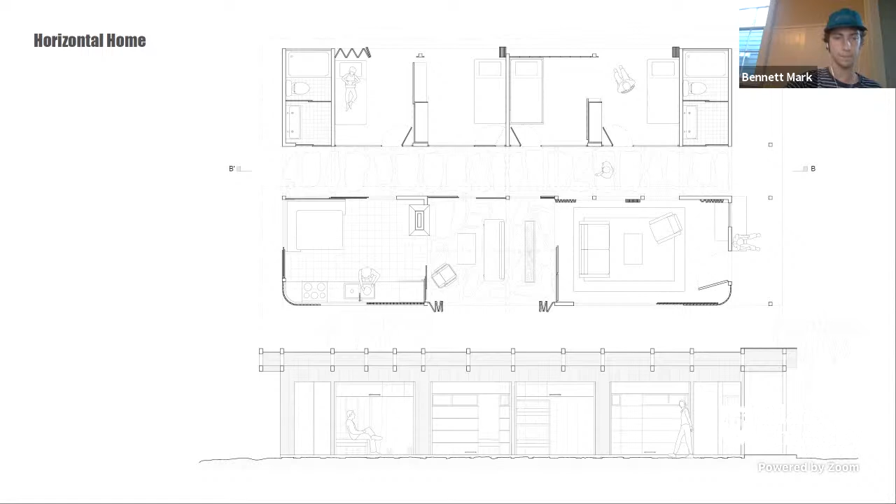In my other projects, I continued to use structure as a driving point for my designs. After defining the feeling that I wanted to achieve in each project, I thought about how the building's structural connections and materiality can help create that feeling.

When drawing porches for the porch exercise, I came to realize how vital porches are to a New Orleans block. Porches in New Orleans are a great example of the community feeling that exists here, and I believe that they're an essential piece of the New Orleans home.

The site is a typical New Orleans block covered with an eclectic combination of different homes. There are many idiosyncrasies between each home, creating a lovely and authentic atmosphere. It is important to maintain this level of authenticity and uniqueness on the site. There's a struggle between collective housing and the sense of individuality that a home provides.

To balance these two ideas, this project employs the concept of incremental housing. This is the process by which homeowners themselves become involved in the construction of their homes.

There are essentially two different types of units, but the units on the ground floor are slightly different because they have double height spaces with lofts that serve as bedrooms. The unit on this page starts off as a small sized home, but then can be expanded by the owner via light wood frame construction to become a medium-sized home.

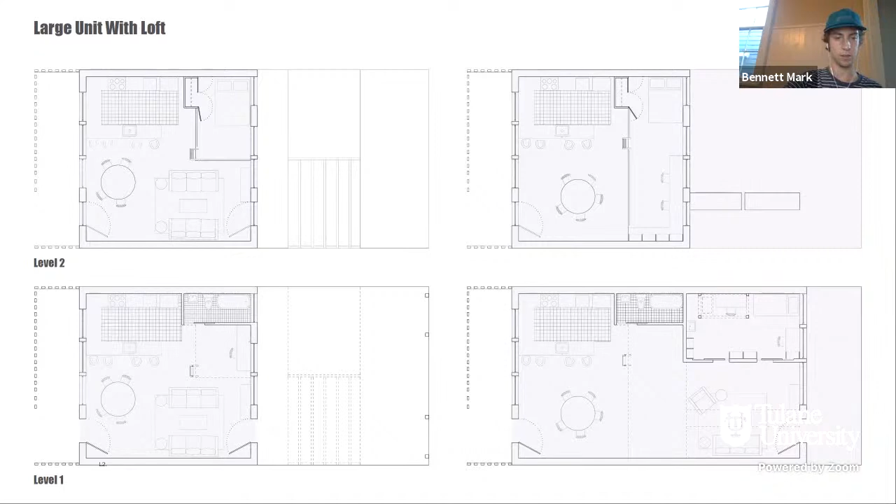Here we have the small unit plans for a typical floor, and here we have the large unit plans for a typical floor.

The project has a central space running across its west-east axis. This creates a path that is open to the public. This space would serve as a park or plaza within the co-housing structure.

On the ground floor, there is a stage for small performances, a large workshop for working on personal projects or for constructing pieces for expanding one's home, and a community house that has large tables, a kitchen, and a lounging area for hosting events. The houses on the second level are connected by large decks that act as both circulation and communal space.

In the center, the deck becomes even larger to accommodate outdoor cooking and dining space. And on the roof of the workshop, there's a garden where community members can grow their own produce.

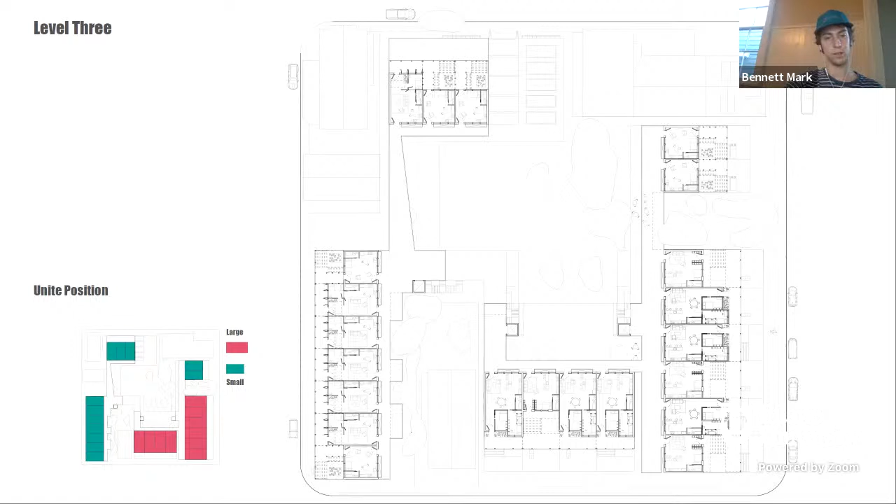On the third level, the decks are minimal to allow natural light to enter the lower spaces. In section, the building creates relationships between the different levels of decking and the central plaza. This allows people on different levels to see what's going on through the entire building, which encourages social interaction between the building's inhabitants.

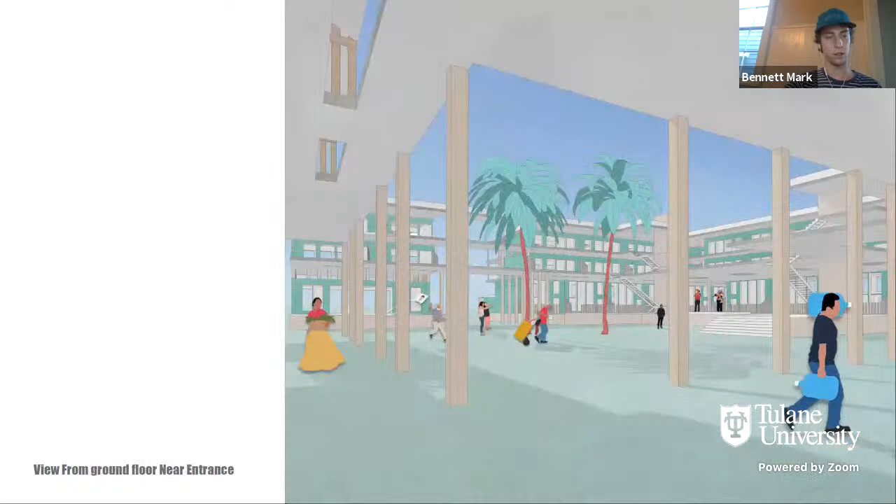The project is primarily constructed out of wood, as it lends itself well to creating intricate and rhythmic structures. Working in perspective, the project tries to achieve a relaxing and free-flowing feeling. Its goal is to be a space where someone can feel comfortable and at home. Thank you, that's everything.

Thank you very much, Bennett. So now we have the feedback from the reviewers. Let us know if you want to, Bennett, show any specific drawing, or if you want him to go back at any point.

I'm trying to get the concept board up on my iPad. I'm getting there so that I can look at all the drawings together. Perfect, thank you, Wendy. I guess now I need to navigate to you here.

I'll start in a somewhat banal but important way, which is that, Bennett, I think your graphics are really strong. I don't know if that will be the case across the board, but I think not only are they really clear, they're also compelling. They're clear both in terms of the intricacy of the plans, including the furniture and entourage, but also in terms of your intent and the diagrammatic pieces.

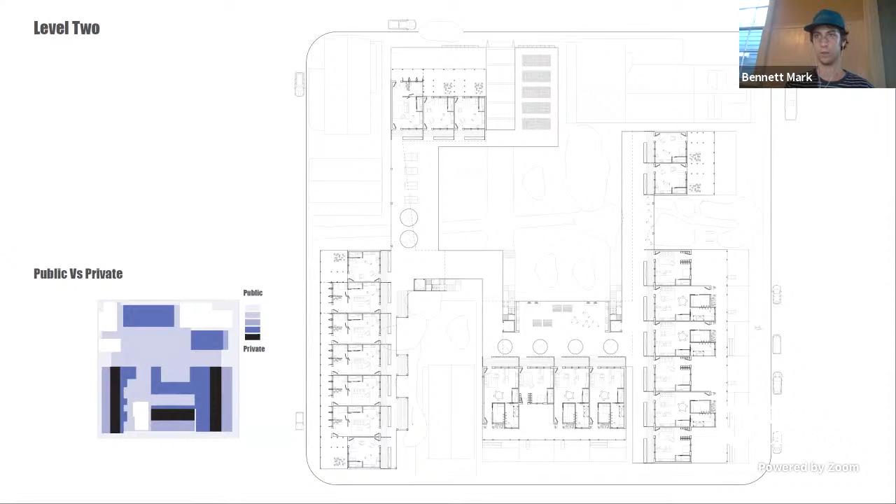Mostly when it came to the organization of where the units were on the site, I was mostly trying to keep each porch having access to the street, and also trying to create that central axis through the center to create a kind of an open public space. So that was kind of the driving factor, the two driving factors in organizing it.

It's a difficult problem, because on one hand, in the surrounding blocks, in your normative residential block in New Orleans, there is a very clear, almost linear progression from most public to increasingly private. The interior of the block is typically just splintered up between lot lines from one house to the next. So there is no shared public or semi-public space typically in the interior of the block. But in your case, there is. So figuring out how to manage those two mirrored images of gradation from public to private is an interesting concept.

What do you have facing that collective space? I see, are those kind of backyards, terraces, or secondary porches? How do you move from the houses into that shared space? They're kind of like small back porches.

I think it shows well in the perspectives. See, you can see it down here and here. It's like a slightly more private space when you're leaving your house. Maybe you could put a bench there, or keep your bike there, or some plants. So it's supposed to be like a small transition.

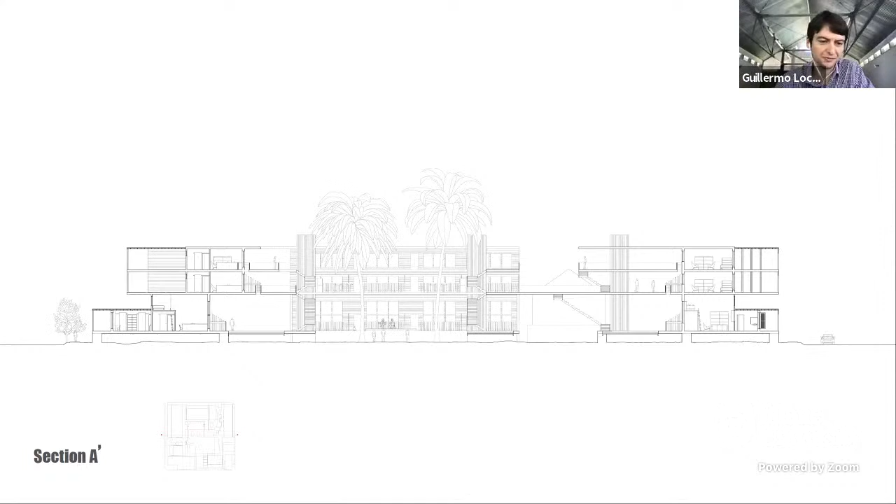We have time, so it's okay. All right, I guess I'd start with a question, but there's an implicit comment too, which is that one thing that really strikes me about New Orleans residential neighborhoods in particular is that there's such a disciplined and rigorous measure of unit, and a kind of application of that unit, whether it's a single house or a double house.

I have several pictures I've taken that I love, that I've put on Instagram, of looking down a series of porches that are meticulously aligned down an entire block and even into the next block, where it's really almost like a shared room, a little bit like what you created in the interior, where you have a long shared access corridor, but with subtle demarcations of: yes it's shared, but this is my house's contribution to that shared corridor. I think that really exists in many New Orleans neighborhoods where the houses are very meticulous.

Of course that's created, I'm sure to some extent, by mandate, by setback codes that were consistent for all the houses. But there's such a consistency and deliberate alignment of those spaces. So I guess I wish, a little bit, you've created an amazingly rich series of spaces, both public and private, outdoor and indoor, but I wish there was just one thing. Especially since you emphasized it, and I totally agree with you, I wish that porch element was something that, whether the porches are deeper or narrower, they all align and kind of overlap at some point to create this peripheral zone.

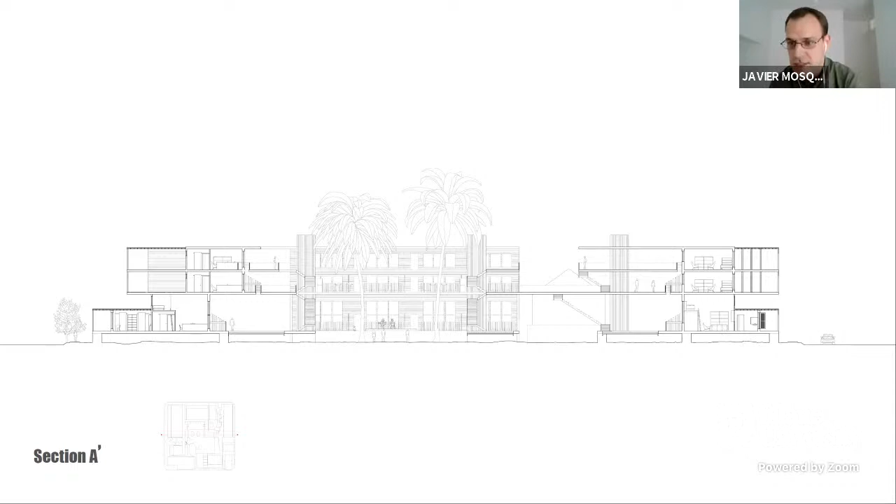I'm saying this just as further steps for your project. Right now it's really, really well done. I would also say I appreciate all the effort you put into drawing the house, the home unit. I think it's a really well drawn and thought-out unit with all the measures, and it's great work. So congrats, Bennett, congrats, there you go.

I will jump in, following on Wendy's and Javier's comments. I'd like to start by congratulating you, Bennett. I really like the way you've approached the idea of context in New Orleans for your project. And if you can go back to the axo.

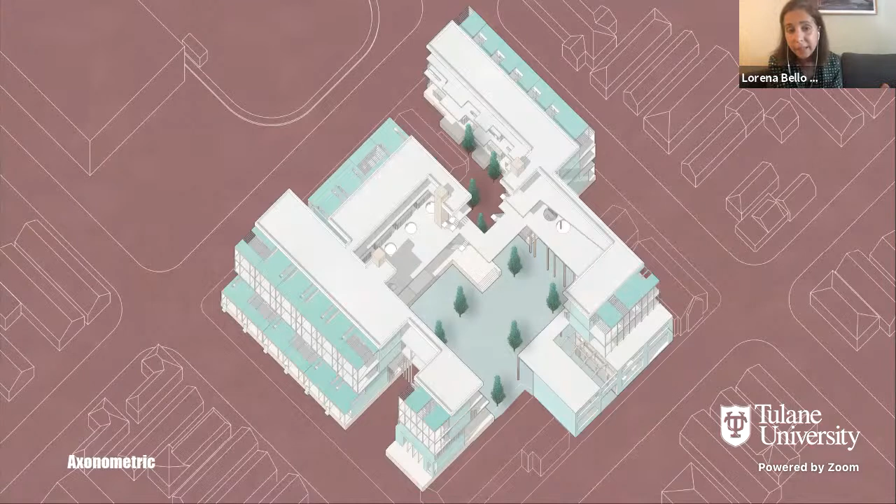Here there is something very interesting about the idea of densifying a block in New Orleans—a very interesting block that is all kind of square, made of very long units, as we see in the blocks to your north, south, east, and west. I don't know what's happening to the west or where north is here, but in every direction there's this particular block and very long houses that work well with the climate of New Orleans, which is extremely humid and wet, so architecture is normally very thin.

As you don't want a lot of moisture, everything you want is ventilation. I understand there's a diagonal in this massing effort to somehow open winds into that block. I'd like you to explain more about how you've thought about winds and drying out moisture, because in the section you are above ground, really responding to this idea of detachment from the soil that is wet.

I also see a lot of permeability that talks about that. But please tell us a little more how you have confronted the idea of thermal climatic response to housing in the city of New Orleans. That is one question. The other, responding to Wendy's and Javier's point on the idea of pores, I see a difference between your approach in this axonometric - the southwest is totally different from the southeast, and it seems different from the northeast as well. I'd like you to talk about your decisions on how to confront the street, and why in the northeast you keep your facade at the same datum, whereas in the other two you create a recess in the second floor with respect to the street.

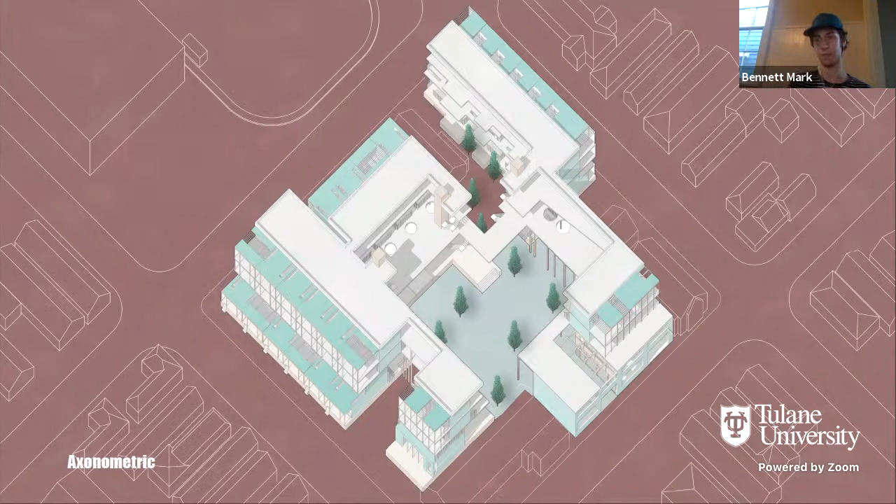Did you take the wind into consideration when thinking about the massing of your project? What is the major wind direction in New Orleans? I'm not actually sure what the prevailing winds are here, but I was mostly trying to keep everything as open as possible on all sides. That's just how I like to design my buildings - imagining lots of breezes and a very open, free-flowing environment.

It would be nice if you could clarify - what is north in this axonometric? The north would be running... it's actually this way, this street. Yeah, I think this is Dryades Street, and it's running towards that street. So let me annotate.

So let's see, would you say north is like this? No, I think it's 90 degrees to that. I should double check it though, to be honest. Yeah, it's here. This would be north, and to the south would be the Mississippi River, because every block confronts the street. If we see the north, where is it, let's see, so north south, then it will be here.

It seems that, and Wendy can talk more to that because she has studied this, I haven't, but somehow there are these long blocks that are always confronting this street.

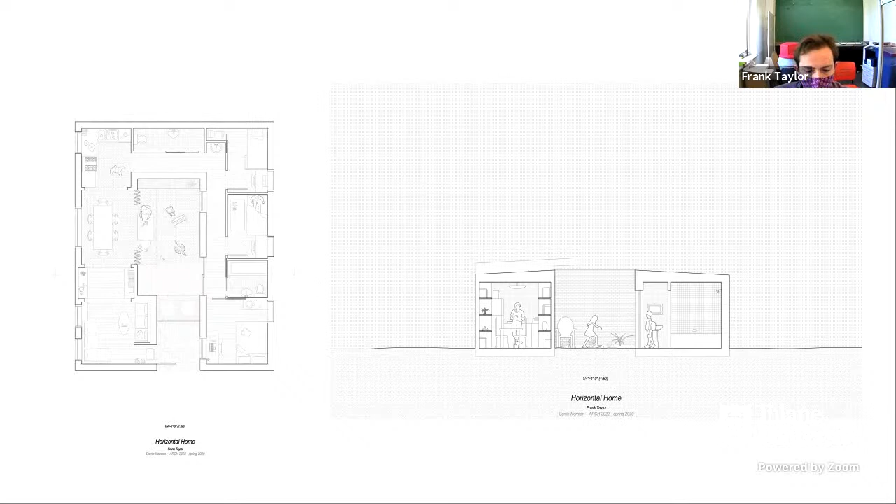In the vertical home, I explored how the public and private could be separated vertically and arranged spaces so that the higher you get off the ground, the more unfrequented spaces become and the more undisturbed you become. The sectional home gave me a chance to explore both verticality and the frontage of open space, with multiple floors featuring courtyards.

Moving from single home projects to a project involving 60 homes, the early idea for this aggregation scheme was to organize it around a series of courtyards and have its walkways in the built environment set up a grid and separate outdoor public programming.

Furthermore, it brings 2 great civic institutions into the urban block: the park and the library. The things you might find in a public park weave into the grid system on the ground level, and as you travel up to the second level into more private residential space, small libraries are woven in. The ground level focuses on exercise and physical wellness, while the second level offers a quiet repose from the action and more stimulates the mind.

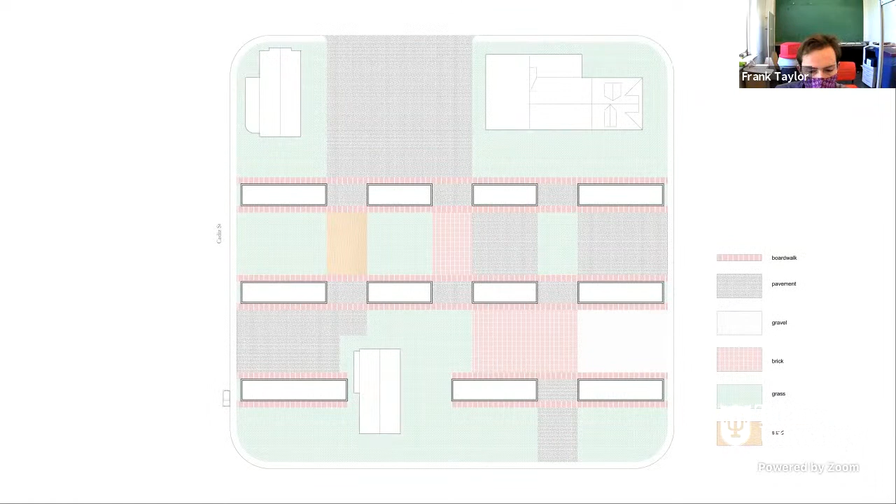This diagram displays the organization of ground textures and materials, which consists of a boardwalk, pavement, gravel, brick, grass, and sand, and a more developed version shows how the park is broken up and assorted around the block.

The outdoor program, consisting of basketball courts, a mini soccer field, volleyball, a skate park, mini golf, an amphitheater, food trucks, and others, is split up around 11 interior spaces that contain stair and elevator cores, lobby and mail space, laundry, ping pong, and pool tables. There is a separation of private and public access as well.

Residents of the block can access it from the east and west side using boardwalks that lead to building entrances. The public can access the block on the north end, which also allows space for food trucks, and the south end.

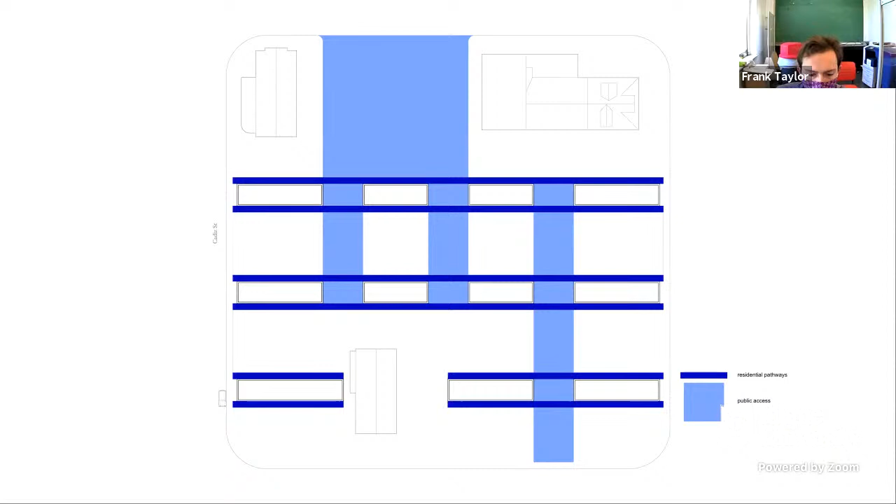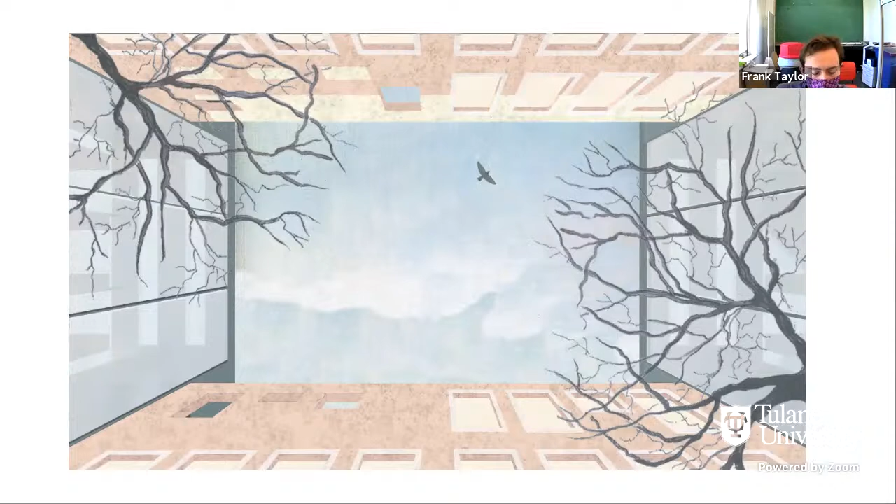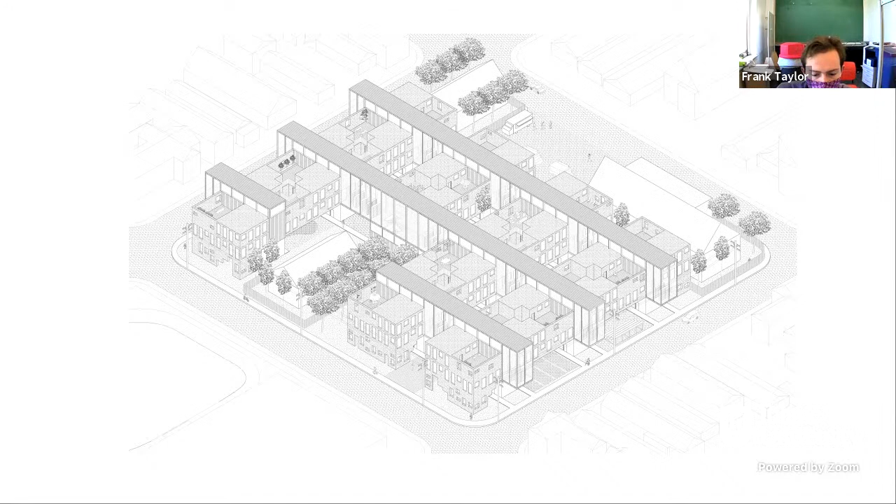The grid formed by the intersections of the heavy apartments and the thin floating hallways and the intertwined park and library ultimately creates a community that is tight-knit, where people cross paths often, where you can dwell in intimacy but are never too far from the excitement, where a bounty of physical and mental needs are just a few feet from home.

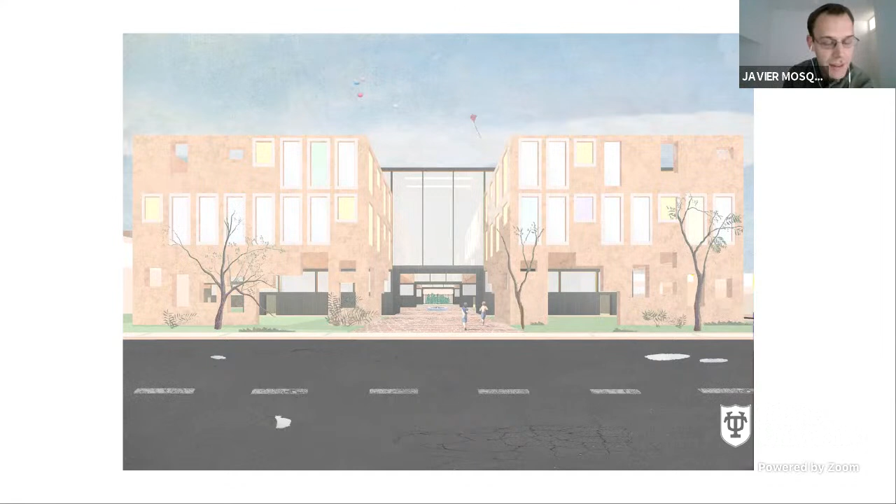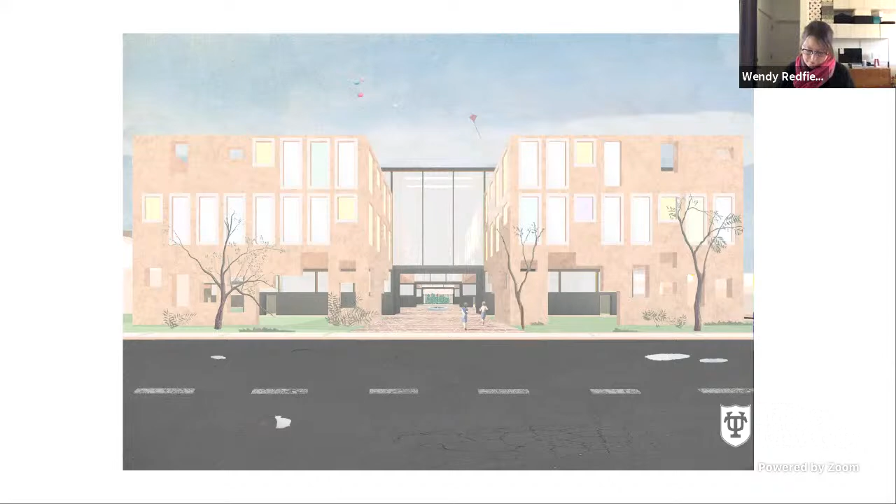Frank, congrats for your project. I do like, the strongest idea you have for me is the stripes. So I would like just to say one thing, why didn't you keep following that stripe idea inside your homes? Could you go to any home unit? Yes.

I just, as the stripes, do you mean the stripes on the glazed, the library spaces, or what exactly do you mean by the stripes? Yeah, you have those stripes, right? Which are the library, and those stripes, which are the homes. And then you split this stripe into two parts, because you have one and one, this side, this side. So once you move inside one of those, for instance this one, you have this stripe, but for me, once you move into this interior, it's a little bit more confused. Why don't you keep following this kind of stripe idea?

I don't know how. Yeah. Maybe just understanding that this is clearly shown. I don't know how, but yeah, trying to. I think he means just at a smaller scale, as an organizational device, right? Yeah, and that's a great comment. Yeah. Keep following your idea, maybe.

I think I definitely put more thought and time into the organization of it on the larger scale, and I could have incorporated more of that for sure into the units. But it's just like, if you were able to have one more week to develop this project, I will jump inside your home units and try to explore what does it mean building a home with the stripes.

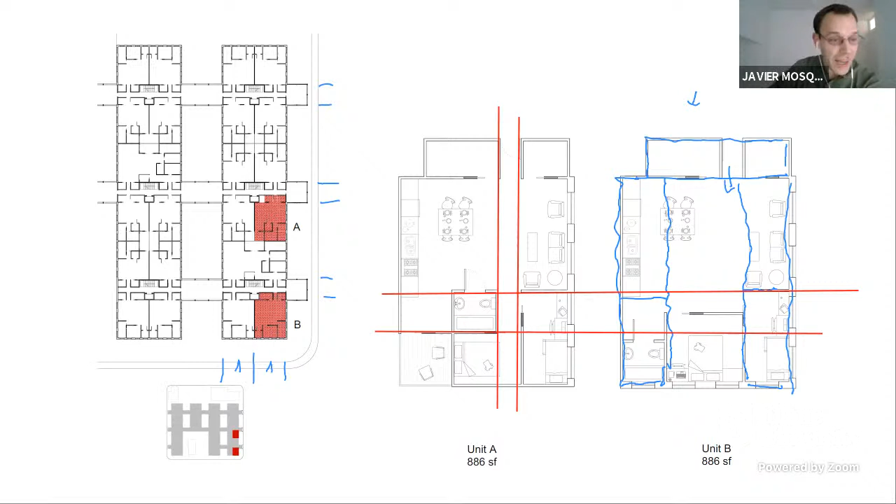And I'm sure you did research on what it means to put different materials into the ground floor. But it's just like, what does it mean building, how do I live inside a stripe? A private stripe, a day stripe, a night stripe, a cooking stripe. I don't know, just have that in mind in order to keep growing with that. But congrats, Frank. Congrats. Thank you so much.

Frank, I join Wendy and Javier in saying that it is a really fantastic and really thorough project. And I totally agree with this idea of really meticulously working with the right scale in context, because somehow it just feels right. Like the height feels right, the composition of the block feels really right.

The relationships with the remaining buildings are really well worked around. And I have to agree with Wendy that somehow when you go into the axos, it just feels like, yes, continuing with the idea that in the axo, things are very fragmented while being connected through a mat building. So it's all a mat that can be connected in both directions, and then has different levels of individuality and collectivity, which is really well done.

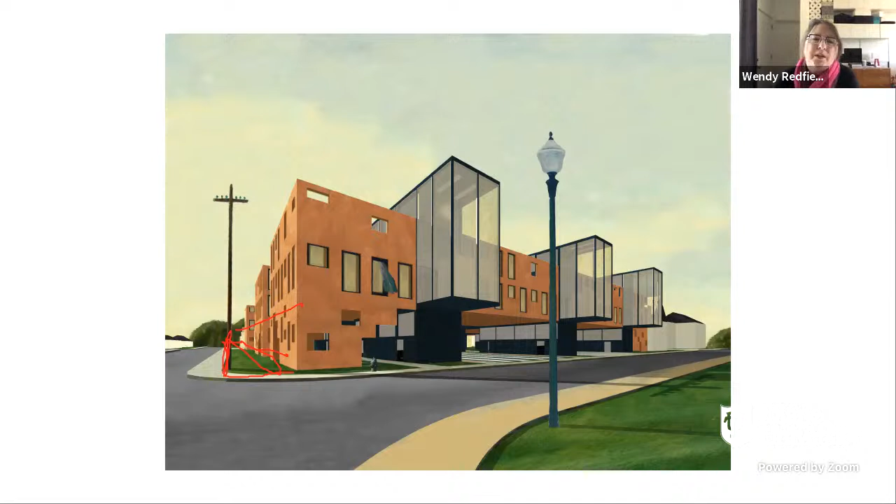I think in part that's what Lorena is talking about, but you need a loggia. It doesn't even need to be a loggia. A loggia to me is almost a European or urban porch, an indoor-outdoor space that's really part of the building facade. If some of these, because I don't think you have any units on the ground floor, right? You don't have any interior there, right? So really, you could take a good bit of that whole lower level and make beautiful, sort of perforated veils of brick that could make it feel less institutional, more inviting, more porous. It would be literally more porous, but also, from the standpoint of imagery, more inviting and more porous.

I think this project is so poised to be taken to that next level of development. Everything just requires more time. I'm not at all surprised that with all the work you did in plan, particularly at the urban scale, you did it so well that you didn't necessarily have time to develop those ideas on the vertical surface. But I think that would be the next step, because you've done a much better, more lively project than these couple of renderings are giving you credit for right now.

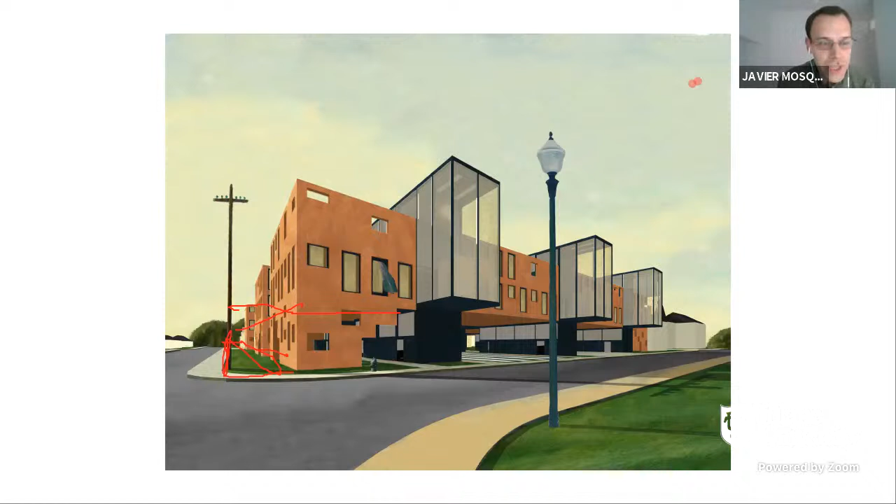So talking about this one more week, what to do in this one more week? Maybe different solutions for the same perspective could be a nice way to explain your project, because it's a modular system, and we change the glass and add whatever. With that in your portfolio, you explain that you're not just working in New Orleans, that you're working on a system. That's the strongest point of your project. Thank you.

Frank, thank you so much. I am so pleased with the feedback you've received on this project. It confirms what I've suspected all along. This is such a thoughtful concept, and it's really difficult to move a good concept into a good project. I commend your commitment and dedication to following through. I love this image. I congratulate you on the body of work, the drawings, the development. I look forward to seeing what you come up with next, Frank.

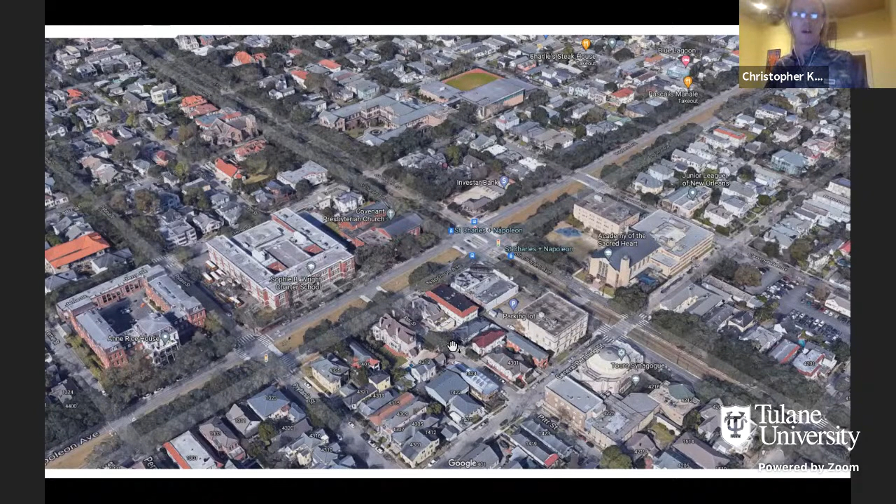I was looking at Audubon Park here on the left, just the way this transitions from the water to the stone and up. There's also the Plaza del Desierto, which was really the inspiration for the pixelation of the interior courtyard, where you could have a deck, a stone paver, concrete, water, marsh, whatever it would be. And then there's some gardening plots, any of which could be used for a garden.

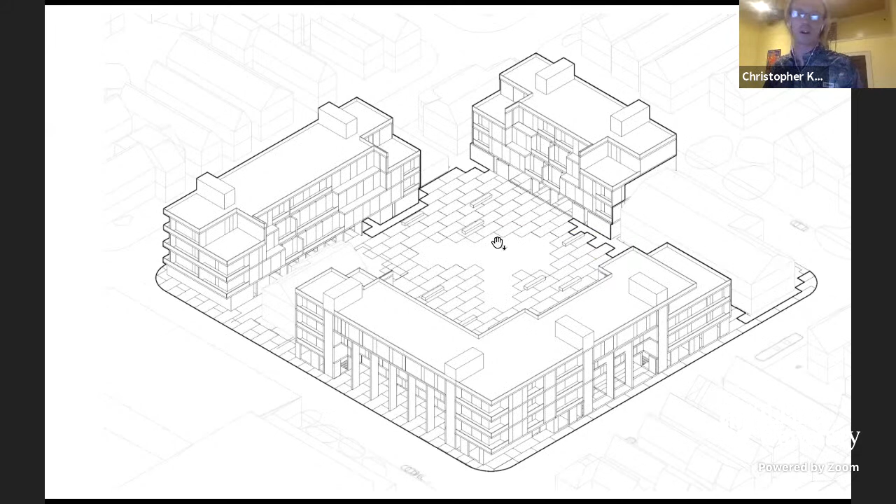Again, the main ISO, so you have to imagine, for lack of it being drawn, some of that's concrete, some of that's marsh. Ground floor plan, we can get into it—the interior rectangles I was imagining as just long concrete benches. You'll see once again in this perspective, I'll try to hustle through.

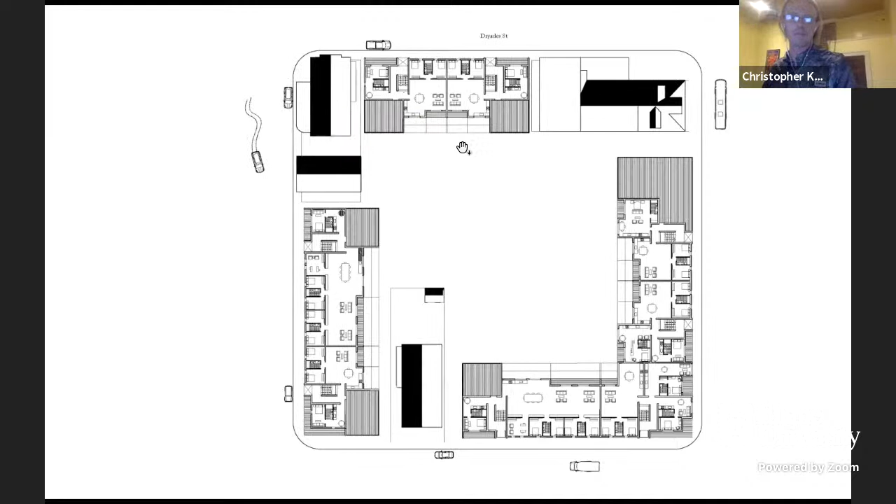Typical floor plan—you can see this is the vertical core accessing an extra small studio, a small 1-bedroom, and then a 2-bedroom.

Just to compare the same logic on the top floor, where you chop away that one unit. Another logic where you essentially take that same unit and double it in size, but there's nothing that really changes about the plan.

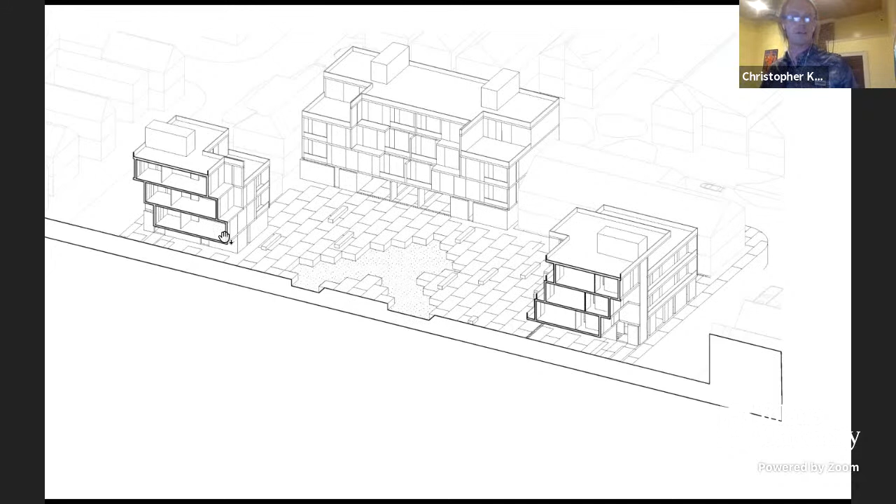In the perspective, you can again see that the unit is divided in two, front to back.

Again, 60 units right on the nose—look for the size. This is an axon that demonstrates just how dense that really is.

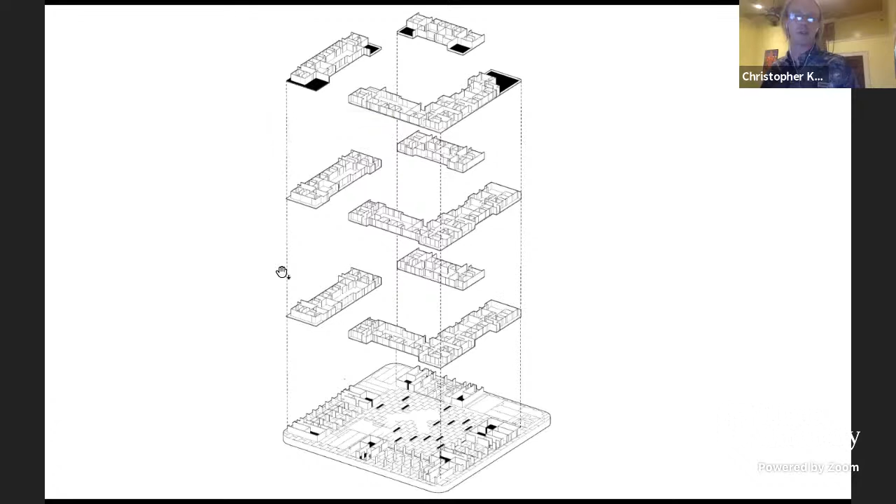A couple quick diagrams showing these collective balconies on top, where you could access all the way from the core and arrive at the top and still have your own little balcony, just distinguishing between the public and private zones.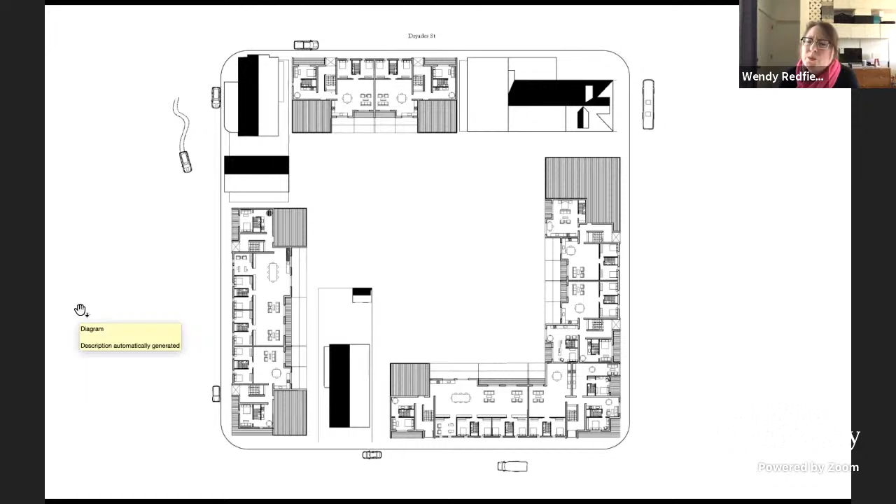I'm not sure, in this area, if it's really noisy at night, maybe you don't want to put the bedrooms on the outside. I really don't know. If you want people to be able to see second line parades going by, maybe public space should hug the street, I'm not sure. I'm sure you could make a good argument either way. But I just wonder, if you thought that through, what the logic was as to how you zoned the units, from public to private.

Yeah, that was, I think, the initial logic behind cascading those central units - that you could have a front and a back porch either way. And then when it came to trying to densify, that kind of went away on the edges for the sake of just adding two units where it used to be one.

So the cross ventilation went away, and along with that issue you're bringing up, the whole logic of how does it relate to the public space. Where the other issue especially is, when you arrive out of the core right here, you have this zone that's just essentially nothingness to get you only to your unit.

So there was, could be more of an effort to expand that area on every level, so you could kind of have a porch that was a collective porch but not a private one on each of those cores.

But yeah, in the end, just iterating down to get the number of units, when it came time to choose which unit do I chop off, the outer or the inside, I chose to chop off the inside so that you could look this way. But I do see the argument for the other one.

And there's really no consideration for any sort of solar exposure, which would really define that answer. I think these are essentially just the same units translated around. There's a little bit of an effort on this corner to create more porch, but...

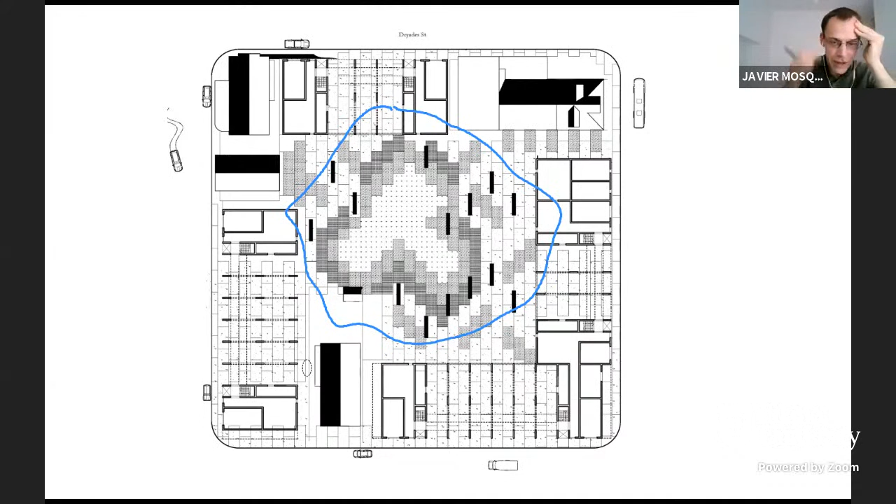I go with Wendy's idea, right? So could you imagine that, let me draw again. Could you imagine that this is your block, this one, and could you imagine that this house is here, this one is here, this one is there, that one maybe is, I don't know, here.

Could you see all your project not in a vertical perfect cut in all the facades? It's here, man, yeah, it's here. What? And then let me. No, it's not so easy.

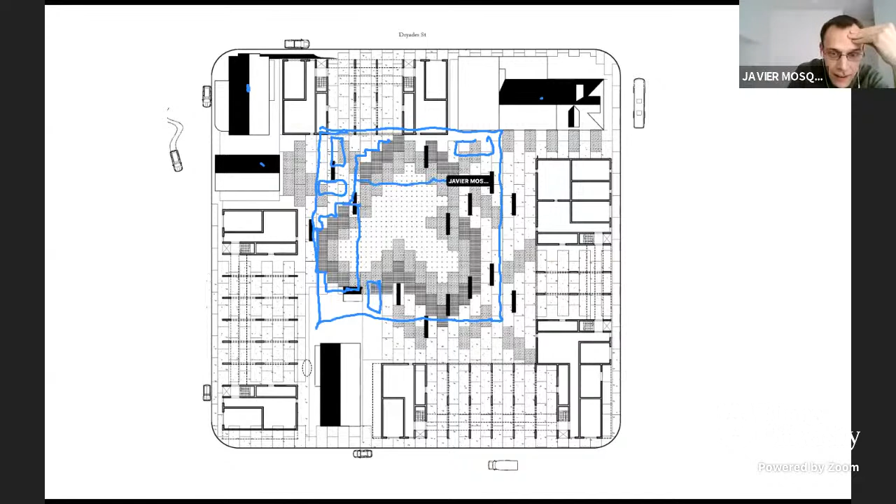It seems to be easy, but it's not, it's not easy, but it would not be amazing so easy. It's not so easy because here, yeah, then you could do something different in here, and then find out what's going on in here.

What I'm trying to say is that all the movement that you create in this pixelation idea, for me the key word in your project is the pixelation, that you use it just for the urban problems, but then when you go and jump into the home, and solve your horizontal home, and applied it into your project. There's one more week to work, and that one more week could be just one unit.

And try to find out what does it mean to pull and push this facade, and where do you pull and push that facade? Because when we saw other projects, this street, that street, that street, and that street are not the same. There is one that is a big empty space in here.

So maybe in that one, you don't need to do any pull and push thing. But on the other one, you could do something that could be helpful to recover that idea of New Orleans porches, loggias, or whatever is the name.

And then going back to this thing, to this gift you gave us, so nothing. Interesting. Yeah, that's really hitting some light bulbs. It's like you take all this time to come up with this idea and then go back to the beginning with that idea and incorporate the rest of the context.

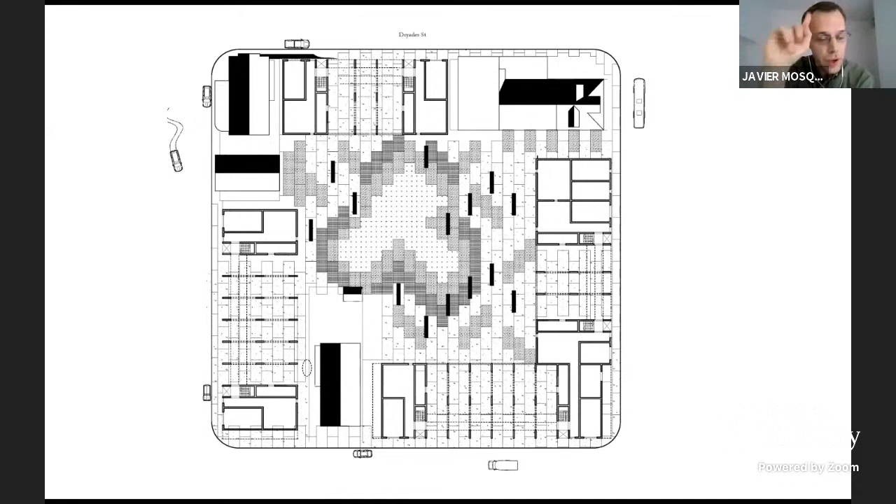I see. But having said so, I have to say that all the answers you gave to your units are a pretty serious game. You play with the rules and you find how do they work. But now it's time to keep moving on and discover how far could we get.

And just one more thing that I don't see really clear in your project is what is your intentional community? Where is it? Yeah, I think I'm skirting around it. The intention is to simply bring nature into the urban grid. And we had talked about garden plots and all this, but that's, I don't know, it's just a placeholder.

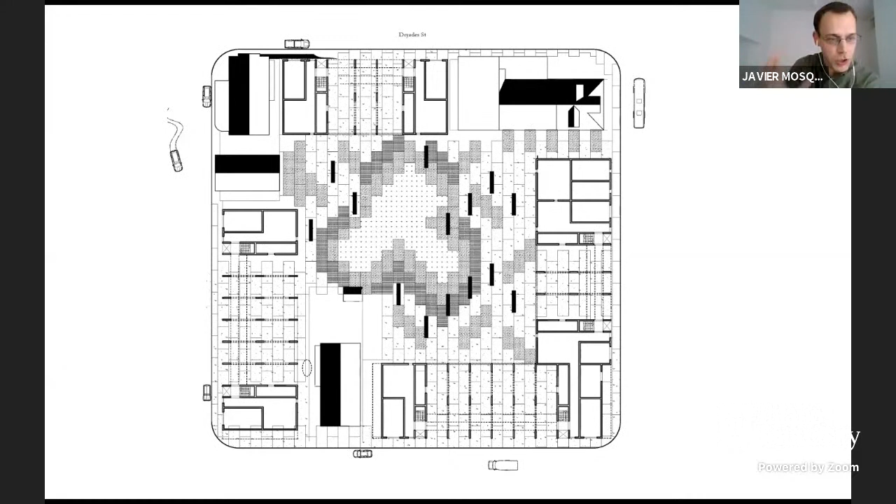Well, but when I ask this, it's because it could be an opportunity to keep developing your homes. All that upper level, all those terraces, okay, this is empty, so common space. It's not like that. So it's what does it mean to put an empty space into a building which is called community? Nothing else.

Well, it will be difficult to follow Javier's enthusiasm. Hey, that's fine, that's fine.

Christopher, congratulations on the project. I was just going to add some observations that I think are really helpful in the way you're working with the urban block. Somehow the buildings that remain in the block, and I agree, to me the most beautiful drawing in your presentation is the ground floor, because it is allowing us to read a lot of effort in addressing what is there, and responding to conditions that you are trying to tame by that interiority of the block, which I think is fantastic.

I have a question regarding the difference between, because the name is Plaza del Desierto, but in reality I think it's in Baracaldo, in the north of Spain. So it's a very rainy place, and the idea is to somehow probably work with the water and the pluviosity of that site.

I am really intrigued by not seeing a lot of trees in New Orleans, when I would say, you know, when you go to, I've been to Savannah, never to New Orleans. I am assuming New Orleans is even more humid. And Savannah is this amazing explosion of trees with all these branches hanging into your body, like an embodiment of humidity. And I wonder how do you mesh that idea of that beautiful ground working with the water, with vegetation that maybe is not that low. I don't know if that will be a possibility in your project, because the tree is a pump in itself, and it seems there is a lot of humidity to pump in New Orleans, and I really see this as a system that starts to understand that the interior of the block can be extremely performative towards that climate and towards that humidity.

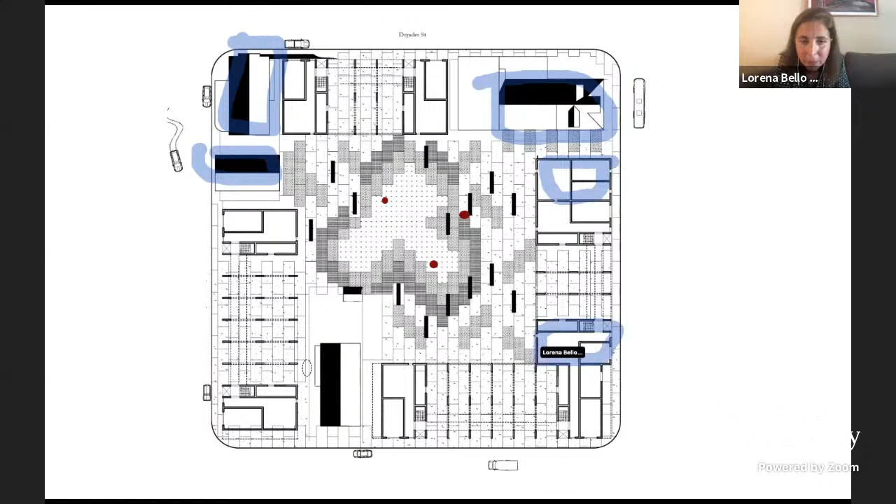My question is, I really like that you have these buildings that look like anchors into that block. Because on each side, very intelligently, the brief leaves these remainings, and somehow I read that if this is an anchor, and this is the other anchor, and this is the other anchor, these parts of your project are also anchors to your buildings themselves, right? Like somehow they are anchoring into the ground and allowing this porosity to enter, but also the water. So the idea is that if you are filtering through the block, then you need to think how this water enters when there is a catastrophic event or a lot of rain, then you need to design for that entrance. So that could be designed in section, and that would be super interesting.

I also understand you are thinking about this as an open plaza. And I don't know how the inhabitants, the community of this block, will feel about that during the night. But I see some dashed lines, so maybe you are thinking that at night you can close this and open it. Can you explain that, Christopher?

It would be less night to day and more - it's mostly closed off, say with some sort of vegetation facade or something that is visually porous, but you can't physically come across there. Perhaps right at that line, each of these pixels would be a little body of water or something that is just another deterrent to go through. But then if you, let's say on a weekend or farmer's market or something where there was an event, you could remove some of those facades or slide them and they could come through. But the idea is that most of the time the public could only come up to that threshold and be able to look through. So to actually access, you'd have to come through these openings - this opening here, through the building itself, through the anchors. Yes, you can think about that a little bit further and how you can make this maybe more available in hours during the day. That will be very helpful.

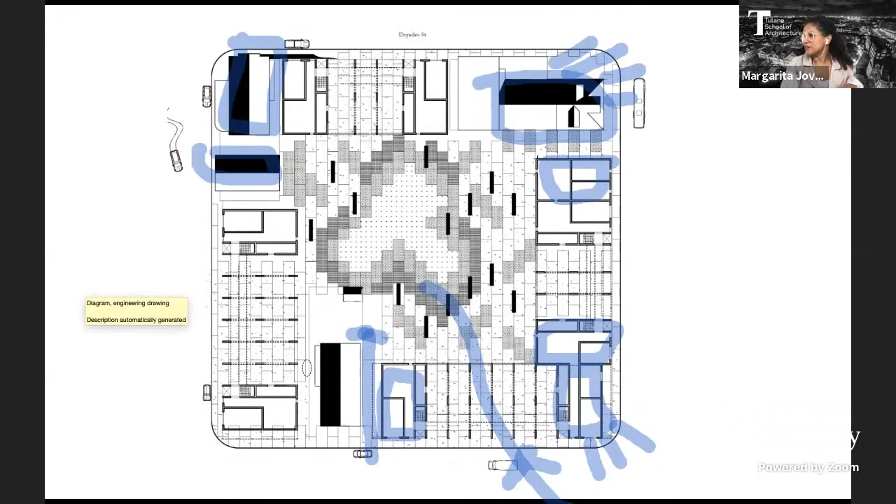I'm leaving to the other one. Thank you so much. Thank you.

I can kind of see what you guys are trying to say. There's back and forth between coming up with your idea and then just stopping and totally rethinking it. I was concrete and glass all the way, but now hearing you guys say that - come up with an idea and then make it cheaper, or make it simpler, or integrate it better into the context. Maybe you could say a word to the nature of this whole game where you're constantly reiterating things. When do you ever land and stop?

But do you say cheaper because concrete is more expensive? Yes, that was my thinking. But it's energetically also far more expensive for the earth. Somehow all the movement is trying to move farther away from processes that take a lot of energy. I don't know how concrete works in Massachusetts because it's very cold, but probably, I don't know how it works in New Orleans. Maybe it also gets moldy. I don't know what the performance of concrete is in this climate.

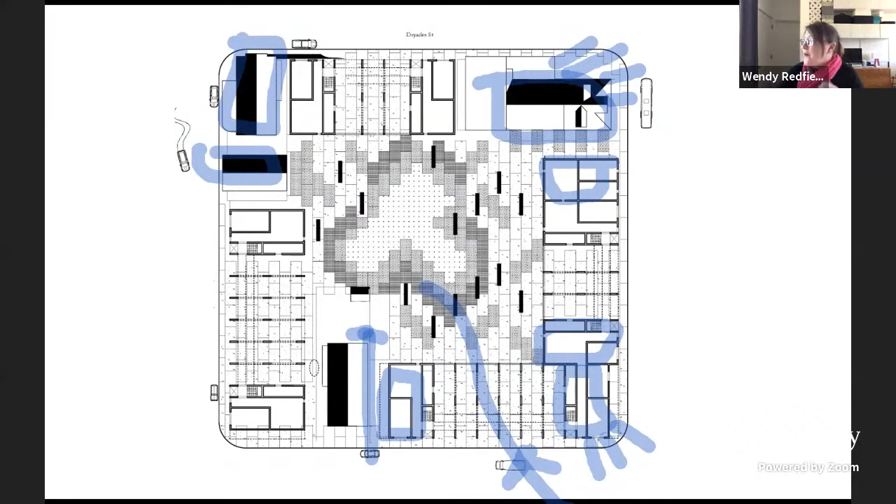I don't have a problem with that per se. The thing I definitely agree with Lorena on is the use of vegetation, particularly trees. One live oak tree in the middle of your beautiful floodable plaza would be big enough to handle a lot of rainfall and soak it up, but also provide shade, reduce the load on air conditioning, and make it a much more habitable space for more of the year because of the shaded areas. So I think that's a great idea. I was thinking, isn't there a place for one? And they can stand the flooding. If you go after huge rains and drive by Audubon Park, it's a lake out there, and those live oaks thrive. So I think there's a place for a live oak in there.

Trees, yeah. Or a tree, a mama tree. Well, I'll admit I'm embarrassed that I printed this drawing with the layer turned off, because this is full of trees. In fact, the shape of that pond is dictated by the existing trees. Oh, okay, that's what I get for procrastinating though. Well, that changes everything. Yeah, just put it in the drawings.

Well, fair enough. Thank y'all. Thank you, really, thank you, nice.

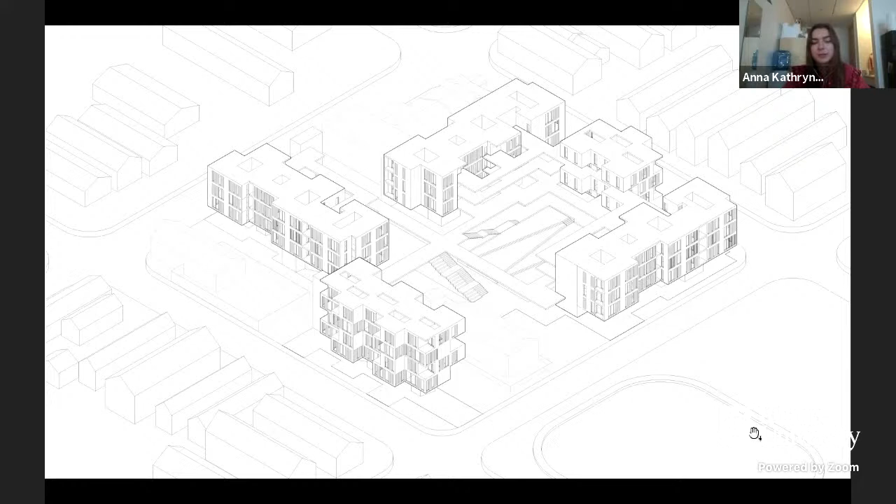Hi, I'm Anna Kathryn Becker, and this co-housing community is known as Music Park. Physically, it is divergent from its uptown context, but the spirit of gathering around music weaves this community perfectly into the city of New Orleans.

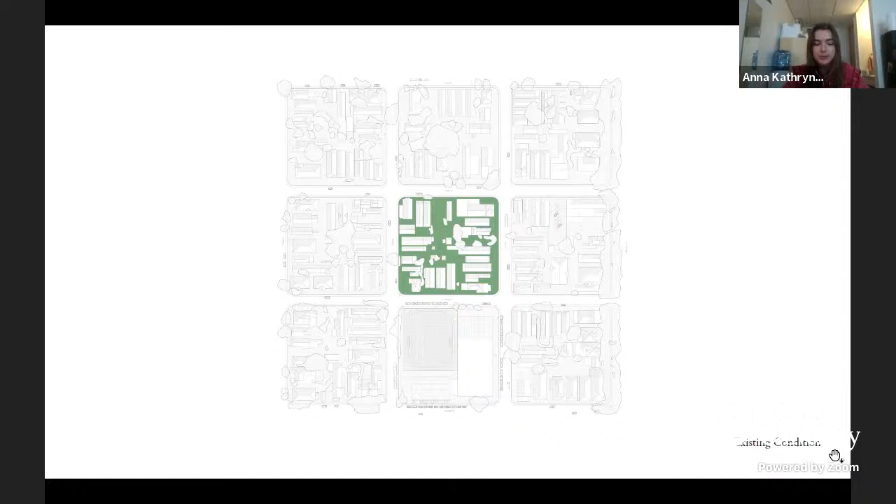Music Park is located in the uptown neighborhood with a very established urban fabric of shotgun, Italianate, and Queen Anne style homes. Located on the block with the aggregation are French Truck Coffee, Charlie's Steakhouse, and one remaining single-family home.

Given how different this type of community is from the neighborhood, it is important that the people living there and their communal interests align with the culture of New Orleans. Since music has brought New Orleans natives and visitors together for generations, Music Park serves as a place for those people to gather, play, learn, perform, and live.

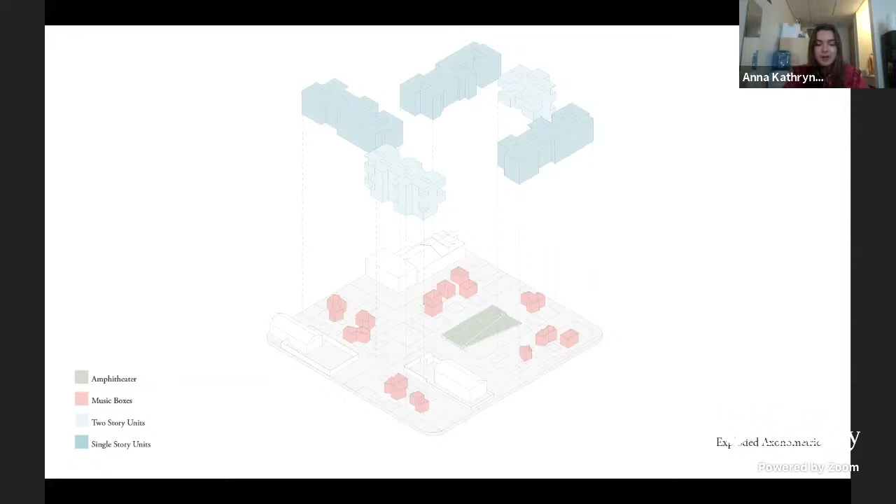All of this can be done in the pink units called music boxes, or the outdoor amphitheater highlighted in green. You can also see the two-story units in light blue and the single-story units in dark blue.

To begin the design, a grid was overlaid on the available land, and the units were organized around a main axis that would come to define the public circulation.

The difference between public and private is marked by the green semi-public porch spaces that are each shared by 1 to 3 units.

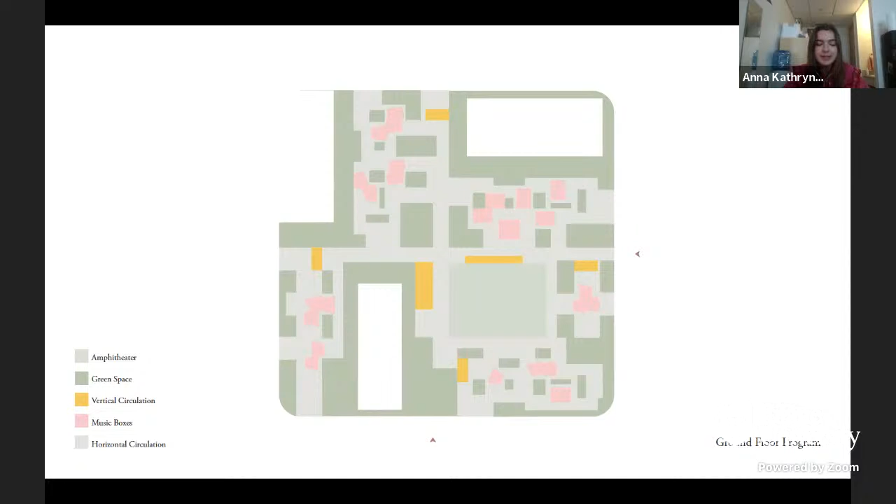The music boxes in pink are strewn about the green space of Music Park. The gray paved walkways connect them with the vertical circulation.

You may have noticed the unique shaping of the music box practice rooms, which were developed for optimal acoustic conditions for different types of instruments. However, all of the spaces are adaptable to many different uses.

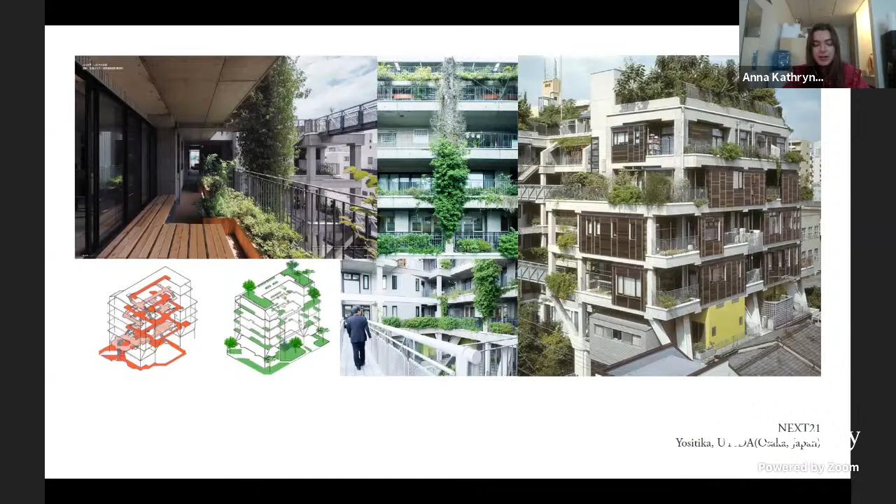The ground level has 2 main public stairs, private vertical cores for each of the 4 main living spaces, an outdoor amphitheater, and the music boxes. The first floor above ground has the only completed raised greenway. This is a space for gathering and walking for both residents and the public.

As the stories increase, the greenways are reduced in size and only accessible to the residents. Each path has a general circulation space and smaller spaces created by voids that serve as porches for each unit.

The voids and outdoor circulation spaces create dynamic views from all points of Music Park. Those on upper levels can see down to the amphitheater and across to their neighbors, while those on the ground level still receive natural light.

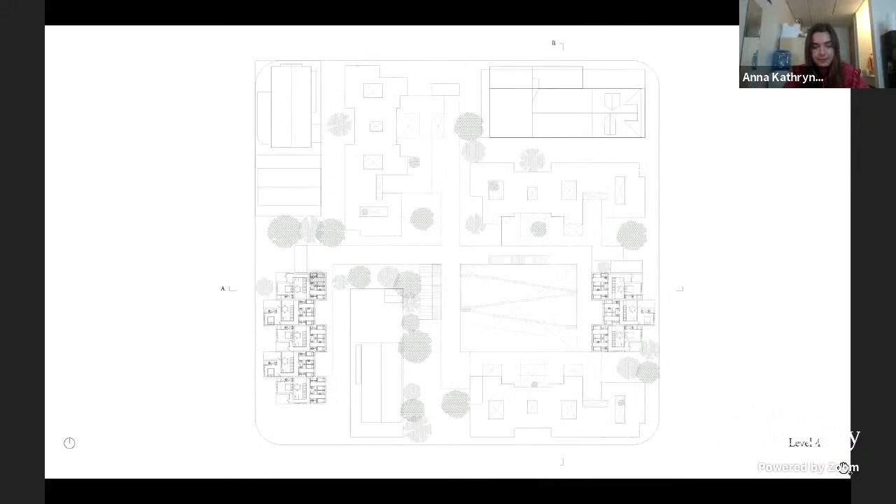Here's the 4th floor with only the top level of the 2-story units. And finally, just the roof plan.

The 2-story units are cut through to reveal the double height space within. The single-story units here are seen in elevation. Behind the 2-story living spaces is the outdoor amphitheater with raised seating areas to look toward the stage under the main void of the aggregation.

Here, the light wells of the single-story units are cut through to reveal how the floor plate pulls away from the windows to give privacy to each unit.

For the unit typologies, we have small, medium, and large units. The single-story units have shared porch spaces and interior light wells, which you can see here, and the general circulation. And here's the breakdown of each of the small to medium and large units within.

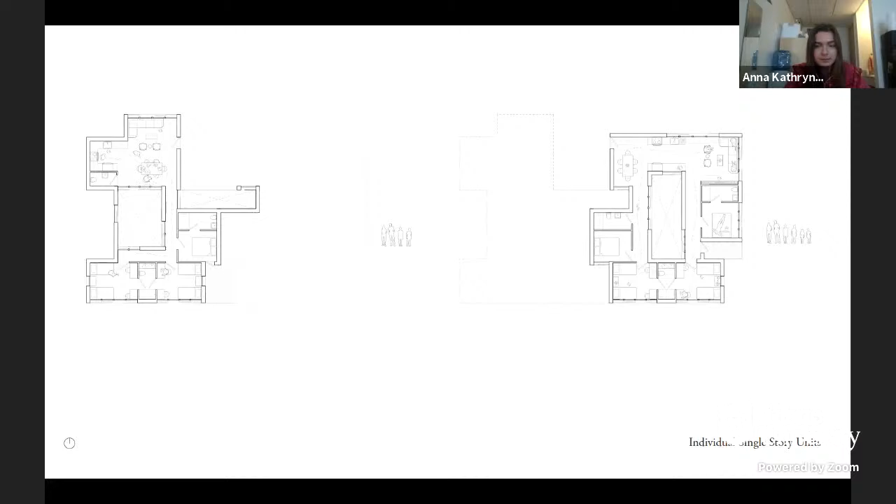These living spaces rest on top of the music boxes and have the light wells that go down to the main ground floor.

And then here is the 1st floor of the 2-story units. They're only entered from the bottom floor of the unit. And then the 2nd floor, you can see the double height space down to the living and dining area. And then the separation of those units.

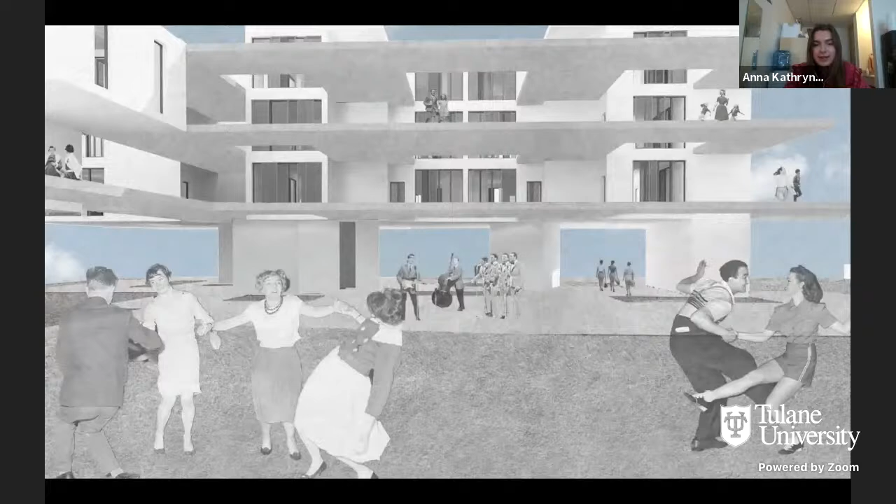So finally, the experience, oh, and here's a section of the double height. And the experience looking to the amphitheater. This is a view of single-story units with the void in front of the windows.

An interior view looking out to the double height. And here's a view of the music box on the ground floor and some of the activities that could take place in front.

And finally, I'm going to show a little animation. Let's see. Sorry, where is it? Okay, can you see that? Okay.

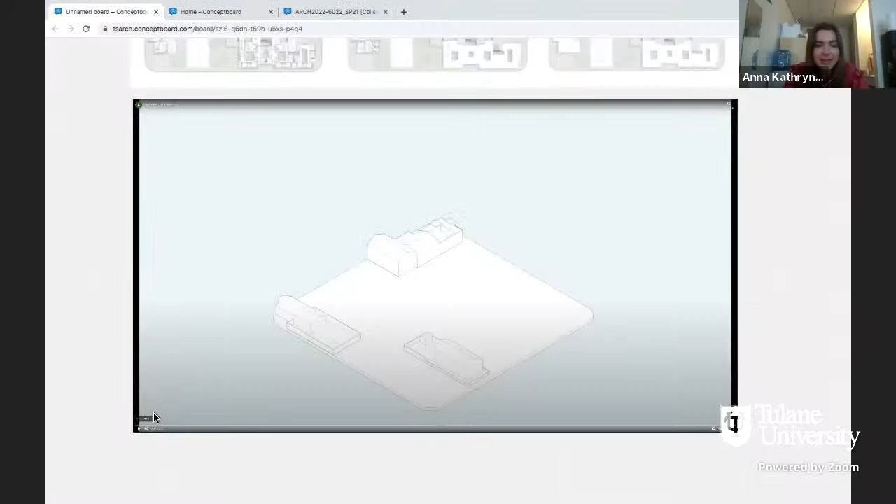And this just shows how the units come together with the pathways.

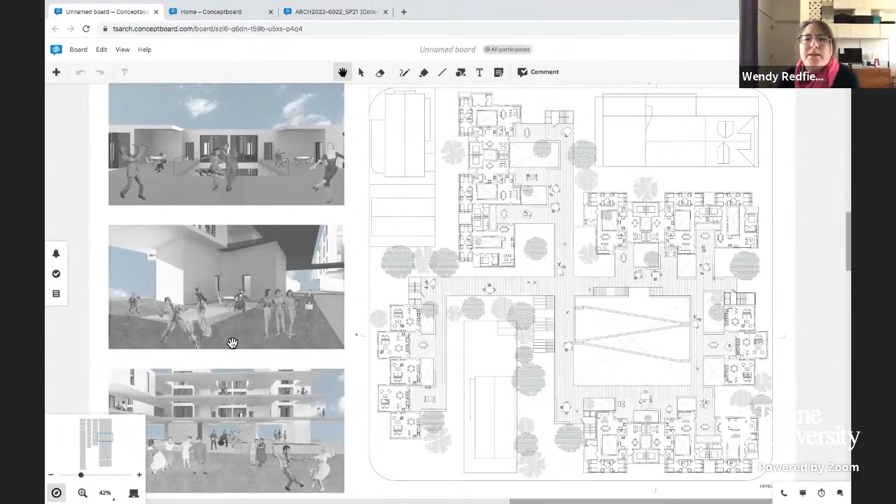I'm not sure I understand the music boxes. Where are they? Are they interior rooms? Yeah, so they're interior rooms around the ground floor, and they are all these separate places for people to come and practice music, to learn music, or to perform in some of the larger spaces. And so they are connected to the units. You can see in section, like here would be a music box in relation to the building unit, to the living units. So, but they're not always underneath the housing units above, or are they?

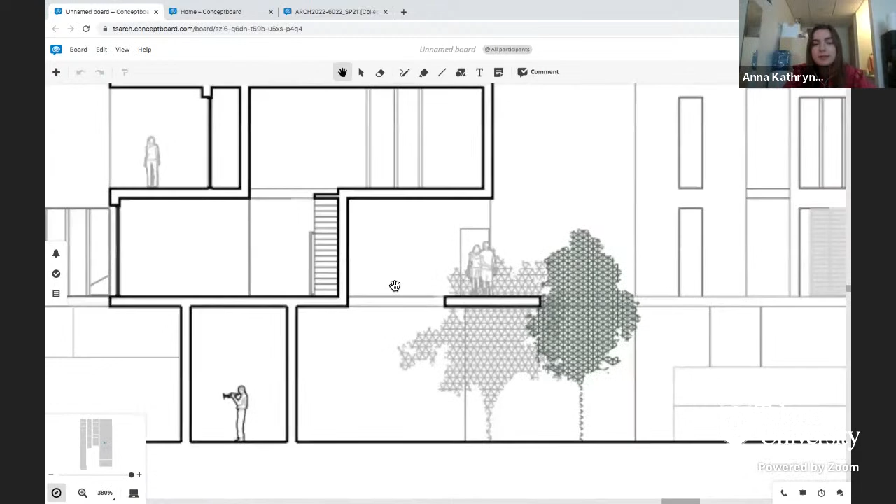They are always. Yes, the roof of those spaces is always the understory of the housing above. Interesting.

Well, I mean, it's a tremendously rich project, and so I commend you on that. There's a lot going on, so it takes a while to get your head around it a little bit.

Can you go back to the site plan or site axon? I really love the incorporation of the amphitheater space. I take it those stairs are coming from the upper level corridors for the housing. Those are exterior stairs coming down to the ground, right? Yes, these are exterior public stairs, and then you have these private cores that go for just the units. Yeah, gotcha.

So, I mean, at first, before you started presenting verbally, I was thinking, oh, how cool, she's got all these sunken gardens and things, I was still stuck on the last project that maybe were also retention ponds when they weren't in use. I think the amphitheater probably would have some sectional change to it, so it might be able to deal with water when you need, when it's raining and you don't have a performance in there. It could become that, and I think that would be a neat idea to kind of make more intentionally.

I love the light wells. I think that's something that's kind of underutilized in most suburban contexts, but you can get a lot of density and still get ventilation and light through that kind of strategy.

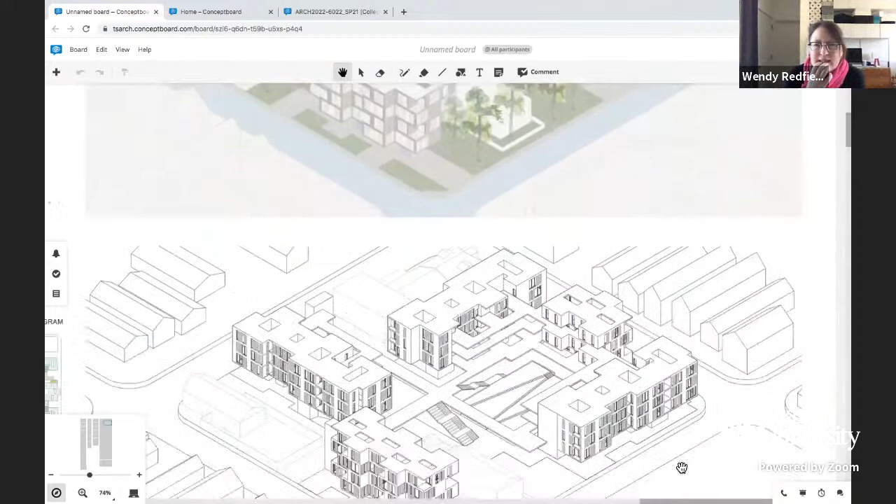This is a project where I really wish, if you could go to the site plan, that you had control of the whole block. I haven't felt that way about all the projects, but it seems like here, with everything you have going on, that initial diagram you did that makes the square a 4-square, you have 4 quadrants. It feels like the lower right quadrant in your plan is the only one that's really fully realized the way you would ideally want it to be.

In other words, you have the housing hugging the edge, and that allows you a kind of public space—in your case, an amphitheater performance space—on the interior of the block. I really think it would have been so neat and rich to have that pattern recur in all 4 quadrants, so you could have different outdoor spaces, maybe of different size. Maybe they're smaller when bounded by some of the larger units, so the outdoor space relative to that quadrant has to shrink some. Some could be more long and thin, et cetera. But you're prevented from that because you have to bring your housing blocks to the interior, since you don't have control of the whole perimeter of the block, the corners, to put housing in.

So I regret that a little bit, because I'm stuck on that diagram of the crosshairs that you did to analyze this. At the same time, I think you've done a really great job with the scale of the project. These are really believable residential buildings. It doesn't feel like this big formal institution—it feels very approachable. There is difference and variety in the spaces and the units, but at the same time there's a very clear logic that plays out through every level, from the site plan level to the unit level to the housing and the experience.

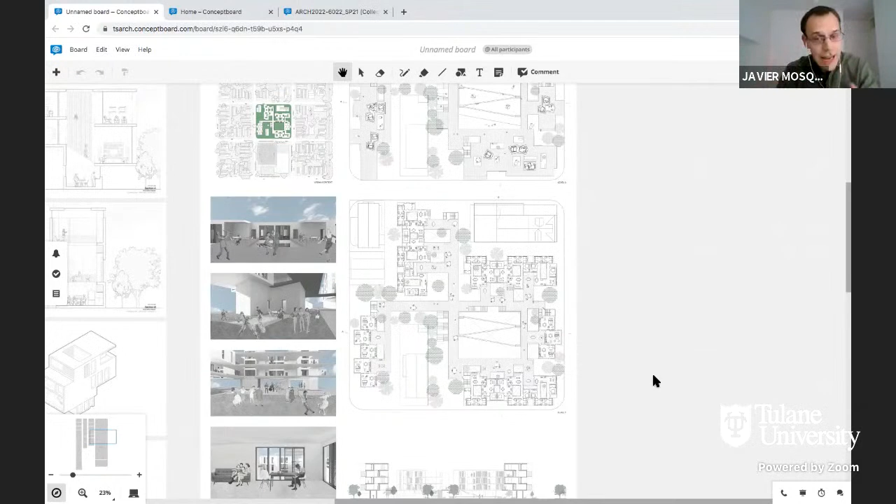And then maybe those boxes add a little bit more complexity to the way the 5 blocks are linked in your project. Because right now they're like corridors in a straight way, but nothing more related to the idea of what music means in your project. So maybe there's a chance to keep working with that idea of music boxes, but not just on the ground floor, but pushed into different levels.

But I mean, congrats, because the jump from this shotgun typology into the linear block multi-housing typology with this clear idea of what a court means in it, it's for me a successful semester for you, Anna. So congrats. Thank you. Thank you very much.

Yeah, I totally agree with that idea. I was thinking to myself exactly the same thing. You can think about the block that we have seen repeatedly with these very long homes getting into this block. And I totally agree with the idea that somehow that block becomes a short slab, because I don't know about the width of it. It would be interesting to know what width you are working with, and how you are deciding on the width depending on where you fall into the block.

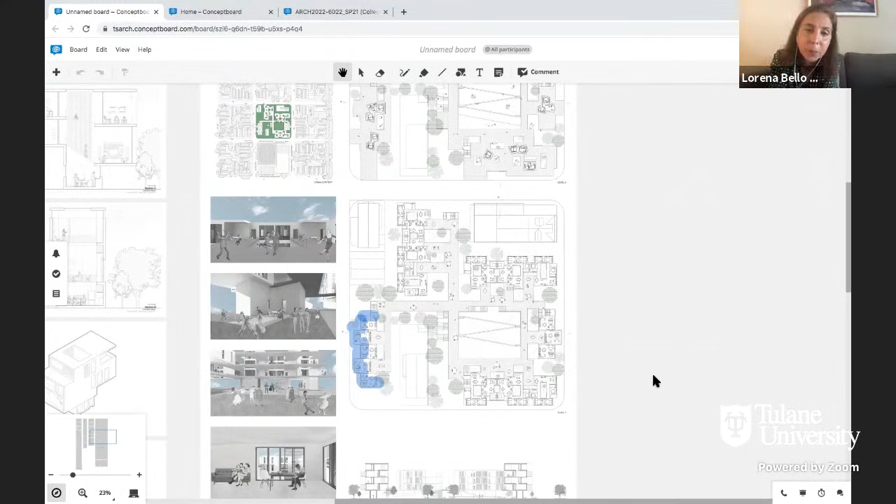Because I see that there are different widths to that slab block, and sometimes, in this drawing we have here in the middle, let me annotate. If you were to look, this one looks very disaggregated, like kind of boxes not resting with each other. Whereas this one, the width is bigger, and this one seems to be the same, and this one is the same as the other side. So it would be interesting for you to explain, when you talk about your project, how these decisions were taken with respect to what you wanted to create inside.

I totally agree that somehow, for me, the interior gathered by the terraces is unnecessary in your project, because I think your first response was to talk about community, and somehow the community seems to be music in this block. If you were to say, okay, there is a festival in New Orleans every year, and this block is part of that festival, and there's a way it contributes economically to the block, that would be very good for the community to collect benefits from this festival that happens yearly.

And somehow during the year, what activates that space are people. I really like that there are musicians working inside a room that is sonically insulated so they don't cause problems with each other, because that is very annoying. I used to have a pianist as a neighbor and I hated him too. You don't know how much. And he was wonderful, but when it's your neighbor, it's not that wonderful anymore. So it's great that the musicians have their own space to practice, but then what can happen is that it goes into your plaza in a managed way.

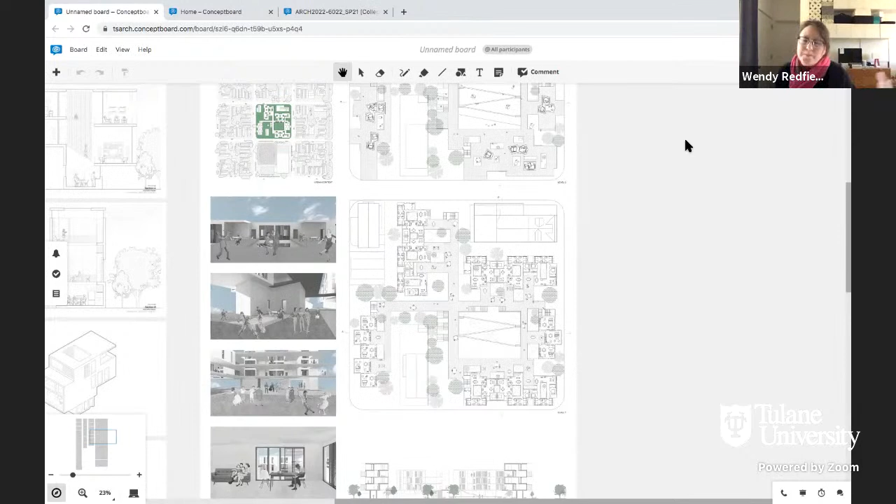And it seems like that idea, the warmth and kind of just more approachability of those wooden shutters that you were attracted to in those precedents, and then the green walls, that would do a ton for this. I think you intend that, but it's really not coming through in your renderings yet. We just see the kind of bare bones, kind of structural walls.

So I would definitely recommend following on Lorena's feedback to take another pass and put in that layer - it's not really entourage, it's between architecture and entourage - your sense of how those surfaces become, some are brown with wood slats and some are green because they're green walls, trained down a wall. The trees kind of disappear in your renderings, even though they're showing up in the site plan. So they're just not doing you a favor in terms of all of those aspects that I know are in your mind's eye, but they're not coming through in your illustrations yet.

But that's easily rectified, actually. So I don't think it's the material choice so much as it is the kind of style of the renderings. That's my take, giving you the benefit of the doubt.

Okay, well, thank you so much. It's a really nice project. Really, thank you.

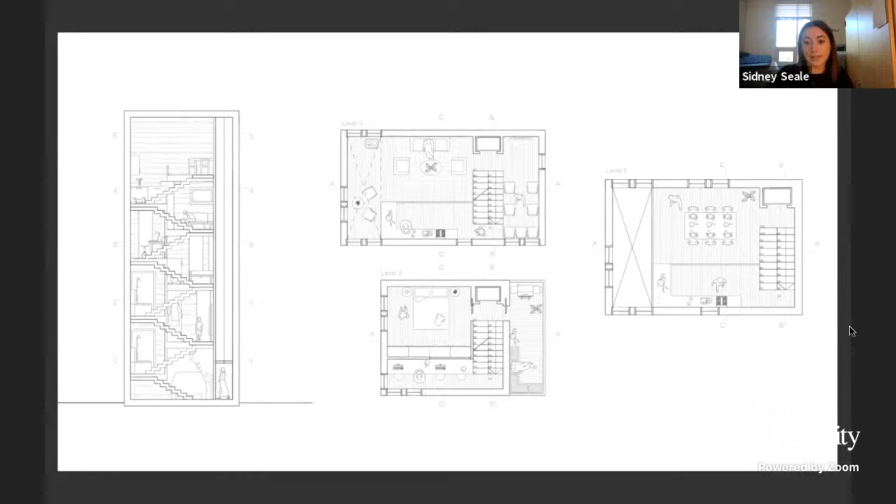Some steps and concepts that helped arrive at the final design: firstly, the sectional home, with the main concept of alternating floor levels that include double height spaces. Secondly, the vertical home, with the main concept of alternating ceiling heights, creating compressed private spaces and open public spaces, with a lattice on the facade that corresponds to the level of privacy of the program inside.

And finally, the main inspiration for the 3-unit designs and the general block scheme of the collective housing project is the horizontal home. Breaking down this plan allowed a range of 1 to 10 person units, and the idea of a central courtyard that connects all access points is present in the final design.

Notable features in the Uptown neighborhood are French Truck Coffee, a cleaners, an elementary school, and steak and Thai restaurants. Open markets such as the French Market, outdoor cafes such as Café du Monde, outdoor gathering spaces such as City Park, and art and music studios such as those in the French Quarter are city staples that help create the creative, festive, and soulful city residents love. So in modified ways, these elements have been incorporated into the ground floor.

Other prominent features of New Orleans homes are wooden facades and balconies. An alternating wooden grain corresponding to the program inside and a single balcony for each unit create the exterior of the design, with concise windows to combat the southern heat.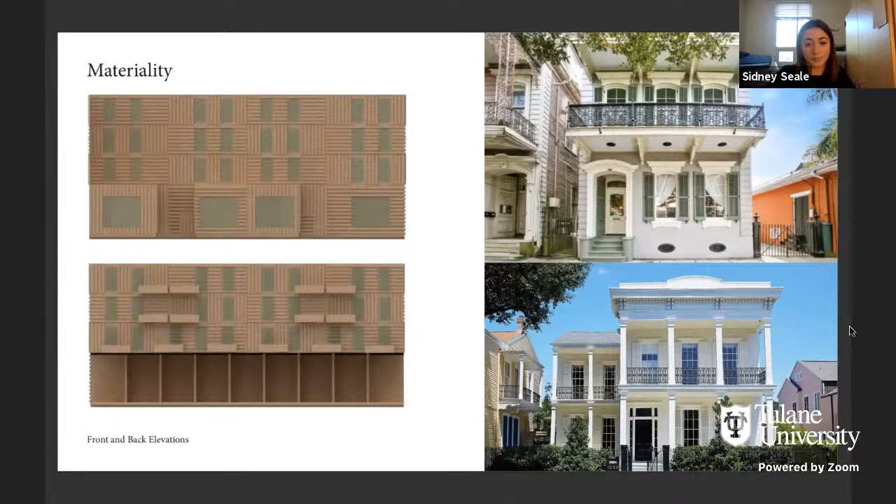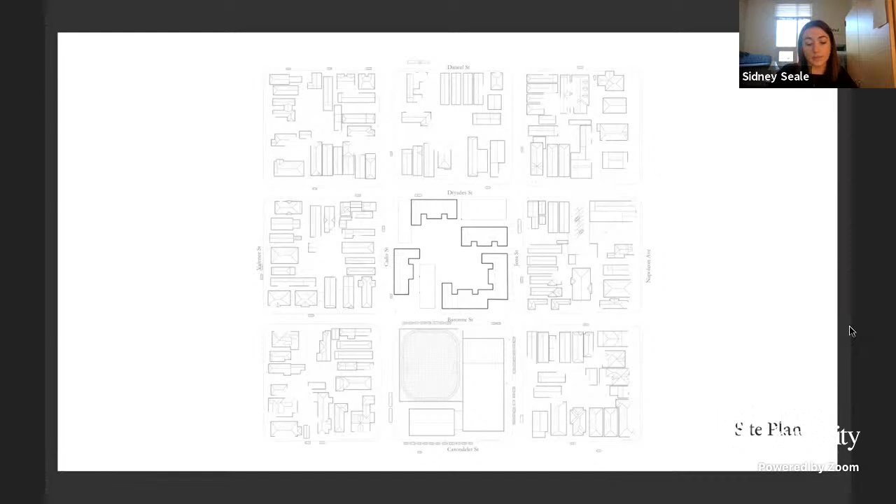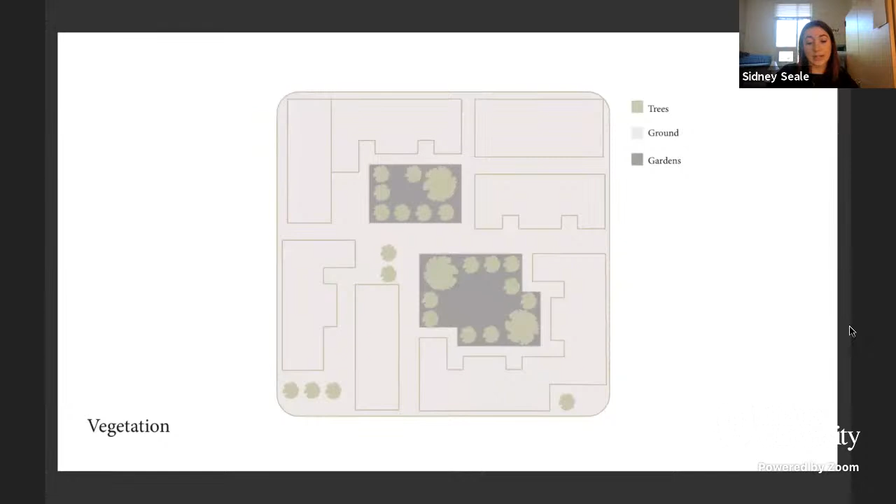Here are proposed gardens in gray and trees that shade the primary and secondary paths in light green. These diagrams show the breakdown of public spaces for everyone in the neighborhood and the breakdown of shared spaces, some spaces being for everyone in the community and some for only those that live in that particular building.

Here is the intentional community for each type of unit, ranging from a single young adult to a family of 5 to a group of 10. And in total, there's 70 units.

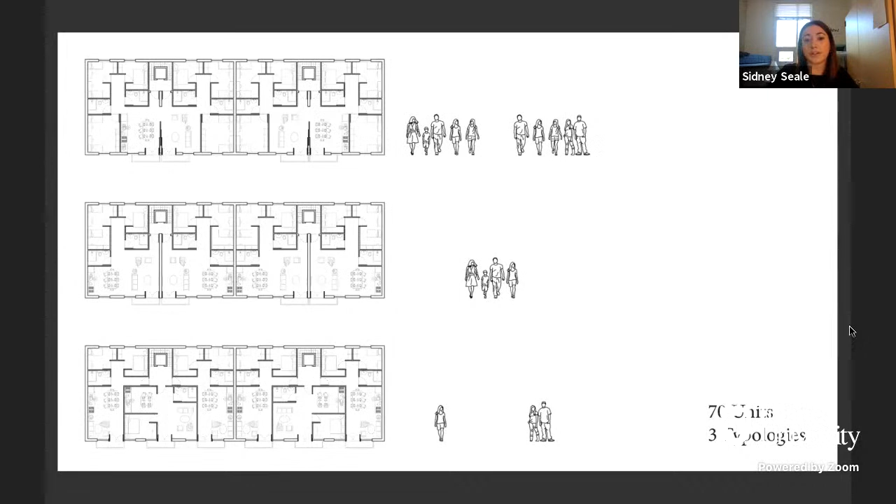This is the third floor plan with 20 2-bedroom units. Here are the units for the third floor, with 2 units being for 1 vertical core.

And finally, the fourth floor plan with 2 3-bedroom units that have a mobile wall in the middle and can be transformed into 1 6-bedroom unit. Highlighted here are the fourth floor units with 1 vertical core being for 2 units.

This north-south section shows how the vertical cores and courtyard connect. And this east-west section shows a little bit more of the public spaces, for example, the pool and corner store.

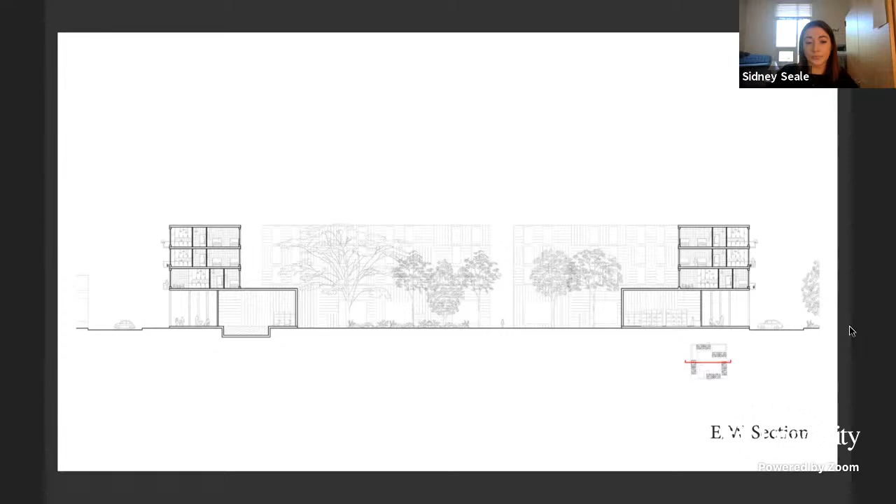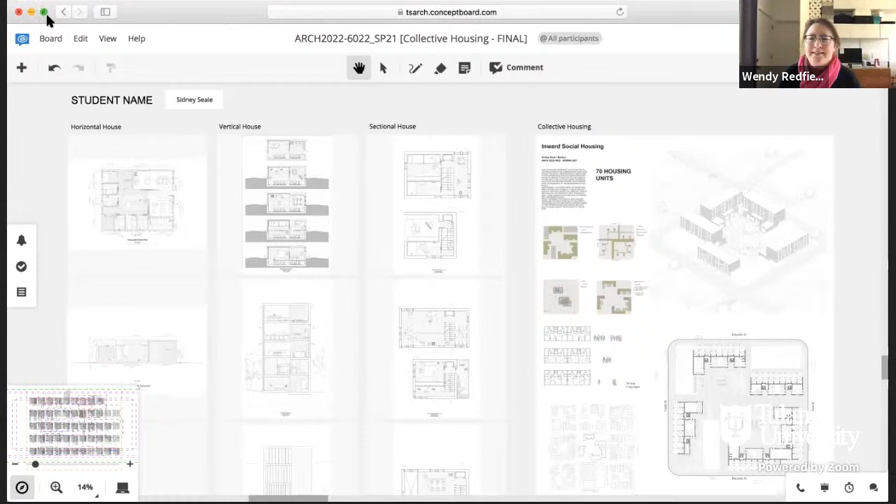Well, I'm ready to say kudos to the teaching team because it's another great project, Sidney. Really nice, it's good to see you by the way. Yeah, she's one of my alums from first year.

Again, very much like the last project, I think you really nailed the scale. Javier really demonstrated what I meant by that—you understand the scale of the typical residential unit in New Orleans, and you grab onto that. Even though it's different, it houses more families, it's multi-story, but you get that idea in terms of the syncopation and rhythm of the street. You don't overwhelm it—it's a rather dainty urban scale when you walk along the street. I think you really got that, and in each of the pieces there's a sense that you've fully integrated and understood that concept, which I think is very important.

I also think that breaking it into these sort of 4 bars—or 5 bars, or 3 plus an L-shaped one—you've done a really great job of weaving those 3 existing buildings in, masking the fact that they're actually interrupting a larger block plan idea. In your case, there's no sense of that interruption. You've really knitted them into your overall composition well. That's something I've seen happening in various degrees in prior projects, but it can really kill a project if you pretend they're not part of it. I can see you were cognizant of that all the way through.

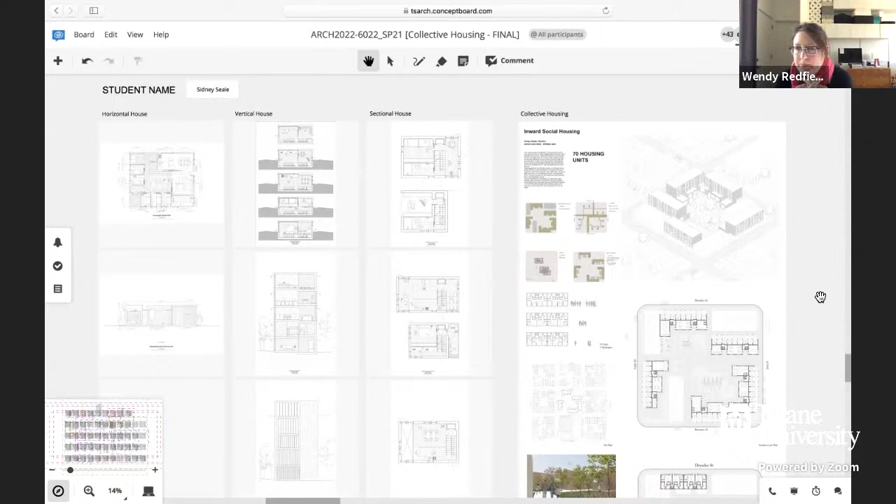I see. Well, I'm kind of torn about that. Ever since I've moved to New Orleans, I'm like, we've got to get a pool at our house. It's a huge amenity here—I would almost say a necessity, except I have successfully lived here without an outdoor pool. But it's such an important part of it, seemingly this climatic context.

And then you have the issue of water and needing temporary, periodic retention of excess water and that kind of thing. I know it may seem a little icky, but they've made great gains in these sort of pond pools—outdoor ones that are cleansed but not completely hermetically sealed environments with one kind of water versus another. So I don't know, I think I might have pushed the idea of an outdoor pool a bit more—you could even have made it partially indoor, partially outdoor, like at Zumthor's Baths, where there's a main pool that's sort of part in the building and part out of the building. I think there's an opportunity there to weave together a really great programmatic idea.

I almost want to go back and say, anybody who didn't have a pool, you missed the boat. But thinking of it as a landscape element, I think there's promise there. I'm glad to hear that was actually your first instinct, and I can imagine there were pragmatic or logistical issues brought up that scared you off. I understand that, but I think that might have been worth fighting for, actually. Maybe you have a retractable roof, so sometimes it's indoor, sometimes outdoor, something like that.

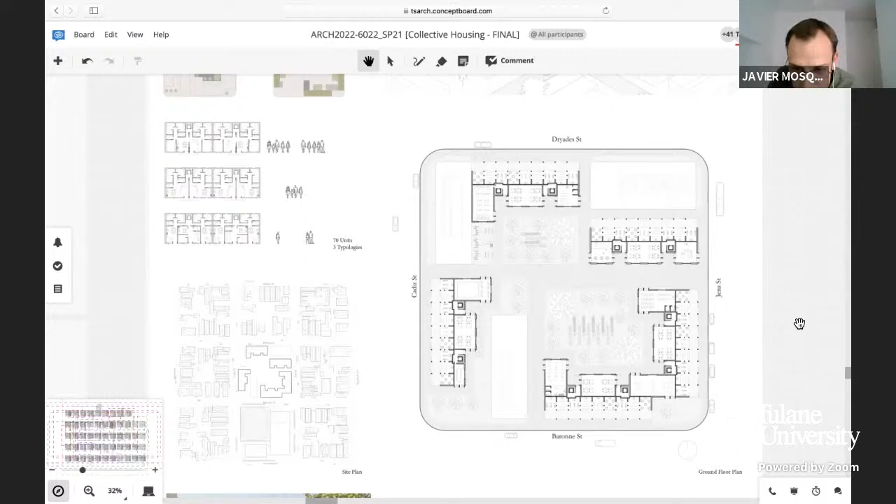I look into the name you gave to your project, which is Inward Social Housing, right? So when we look at your project, it works really well when something like this is happening, because this is inward and this is inward, but when this happens here, it doesn't work so good. So maybe it was time to find out what does it mean to combine two typologies into your building. What happens if this is just a linear block, no more than that? It could work again, it works. It doesn't have to be always the same movement in all parts of your project, right?

And I do like this idea - if this is the section, it's something like this, and then you have these kind of boxes, right? So this is outside and this is inward. Could this be like this at some points in your homes? I mean, each home could have some singular, particular space to be used like an eye opened to this inward place. I don't know why, but I feel that there's something in the language you use to solve or build your facades that can be used again inside your block.

And it can be also related to the way you work on the ground floor. So I don't know, just have that in mind. It's not a yes or no, it's something that when I look at your presentation comes to my mind to see, could it be or not? I don't know, just - not only this kind of eyes in the upper levels, but just have a thought about what happens when this is too close to these buildings. This is a very tricky point in your ground floor plan, but just that. Congrats for the project.

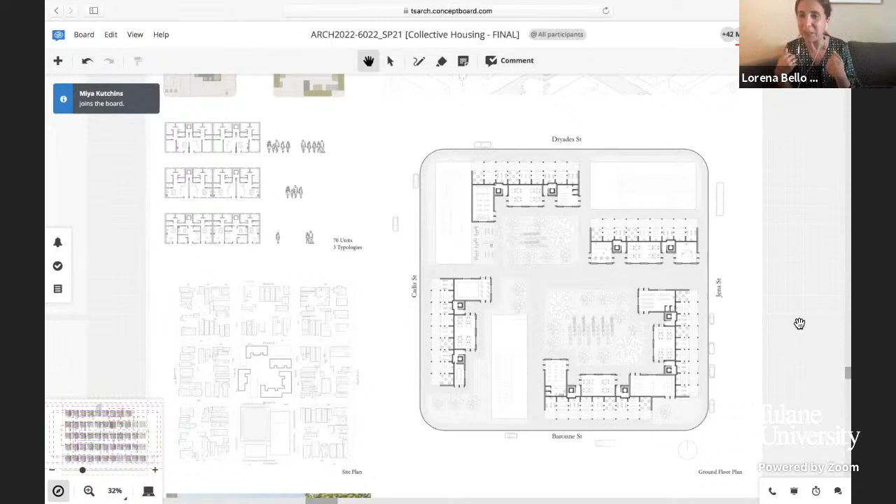Maybe the part I like most is the loggias in this project, because they really fit into New Orleans. I've never been, but from the pictures you gave us, I can see that it's really, really good. It follows the typology but is rethought, upgraded, and modernized in a very elegant manner. The materialities are really well done — I love the materials in the object, the one I like most, because of the elegance of working with material in different directions.

You're able to give a difference so we don't read your project as a horizontal slab. Even though it is horizontal and continuous, we can read different parts of that building. I can also imagine that with different levels of light, that would be very beautiful in the performance of that facade — at certain parts of the day, one direction is this and the other is that, so you'll have different shading responding to the trees you're planting outside. You could also play with that. The trees aren't only pumping, they're like shadow machines, casting shadows into the ground and the facade, creating this amazing atmosphere.